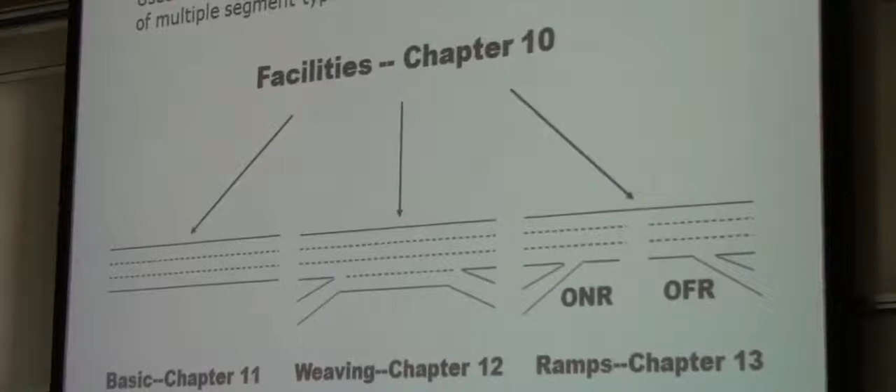So chapter 10 is the facilities chapter. It's the chapter that combines the basic segments, the weaving segments, and the merge and diverge segments into a facility context of several miles—10 miles, 11 miles, maybe longer—and also does that over multiple time periods. That goes back all the way to the 2000 manual, where this methodology had the extended time-space domain, where we can look at up to 6 hours in the current computational engine implementation for these facilities, and we can look at queues growing and dissipating.

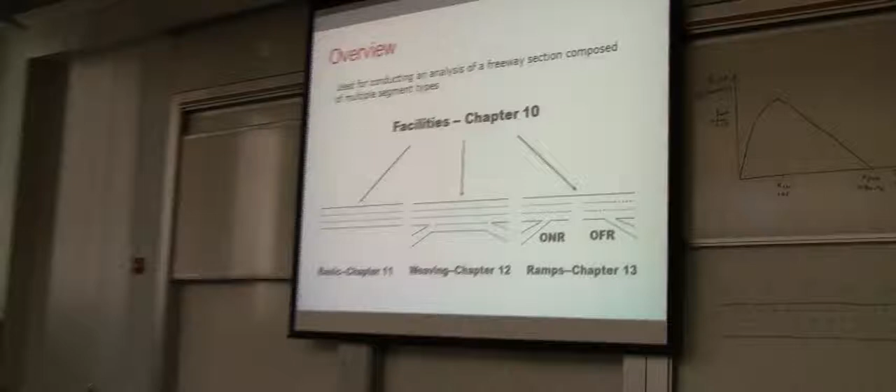Really, on the undersaturated side, this methodology is nothing terribly exciting—it's just aggregation, adding up numbers, doing a weighted average, and so forth. We're not going to spend a whole lot of time on that. But the oversaturated side is a key one to understand, especially important as we're talking about reliability, because one of the key motivations for the HCM major update project is to incorporate all the results from L08, the reliability work, into the manual. This methodology, Freeway Facilities, is the seed file—you can't do reliability for freeways without doing this methodology.

And so even if you're not doing freeway facility analysis, if you're doing freeway reliability, you'll have to go through this process for the seed file, and then we do all the variability in demand and capacity and incidents and rain and weather and so forth. But the core engine did not change significantly in L08. There were some minor improvements, some minor changes to capacity implementation and so forth, but really the concept is the same thing that we had in the 2000s.

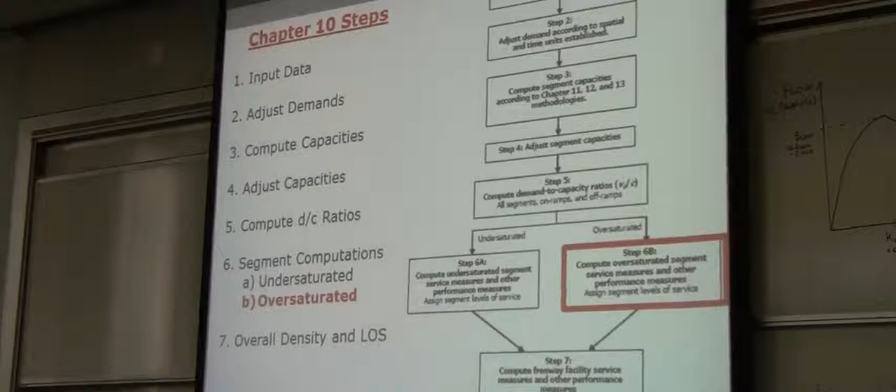And the methodology is relatively straightforward when you read Chapter 10. It gets slightly more complicated when you read Chapter 25, which is the supplemental chapter. But in Chapter 10, it's a pretty easy method: you gather input, you adjust your demands, so the input includes the geometry and includes your traffic volumes, your truck percentages. You adjust those demands to then do your passenger car equivalents and so forth. You estimate segment capacities for all your segments. You can adjust those capacities for incidents, for rain, for weather, work zones, and so forth. That really, step 4, is the key piece of L08, adjusting those capacities to represent impacts of non-recurring congestion.

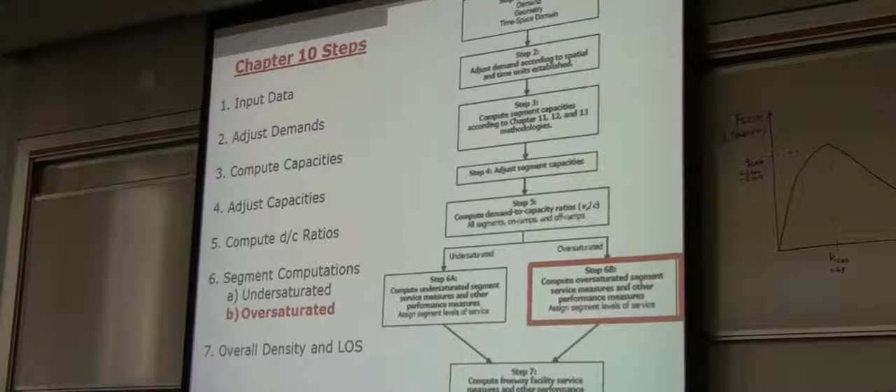You then look at your D over C ratios across all the segments along your facility, and then that's where it gets interesting. If everything is under capacity, if all D over C ratios are less than 1, it's a simple aggregation. But if any segment is over capacity, you go into step 6B, this highlighted box here, and that's the one that then really gets very, very complicated. And really what we're hoping to do today is illuminate a little bit of what's going on inside step 6B, which is described in a lot of detail in Chapter 25.

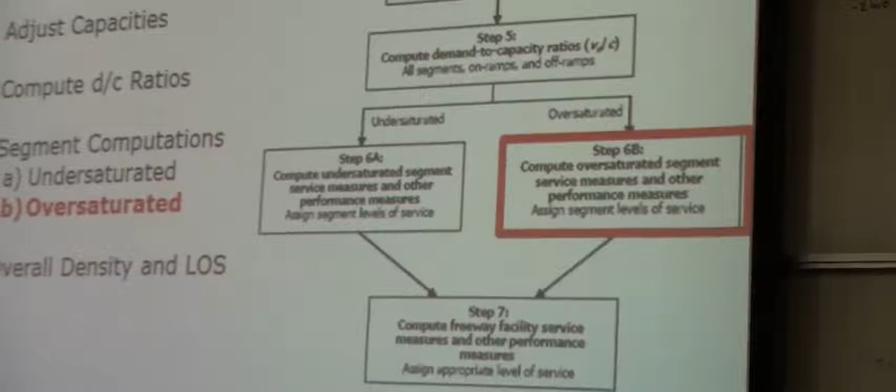So that's what we'll talk about. And then the last step is just, again, estimating the overall density and level of service.

So what is this oversaturation model? You have two primary causes for congestion. You could have congestion either caused by excess demand or by a reduction in capacity or by some combination. All right, so if you have a fixed facility, yes sir, please, it's interactive.

It's interactive. Can you get kicked into the oversaturation model if you just have a ramp merge problem? If you have a ramp merge problem, it will depend. It depends on whether it's only the ramp that's over capacity or whether it's the main line that's also over capacity. But if the procedure in Chapter 13, if the ramp influence area is over capacity, it's essentially looking for any D over C greater than 1. So yes, if the main line fails in the ramp segment, then it will be invoked. D over C greater than 1 across all lanes. It could be the two right lanes.

Okay, great. Yeah. However, it will not be invoked if it's just the on-ramp, and that's the discussion we had at the webinar, that if it's only the on-ramp that's oversaturated, but the main line itself is undersaturated, then you just have really long queues on the ramp, but you don't have any mainline queuing. That's debatable whether that's true, but that's the way it's currently implemented.

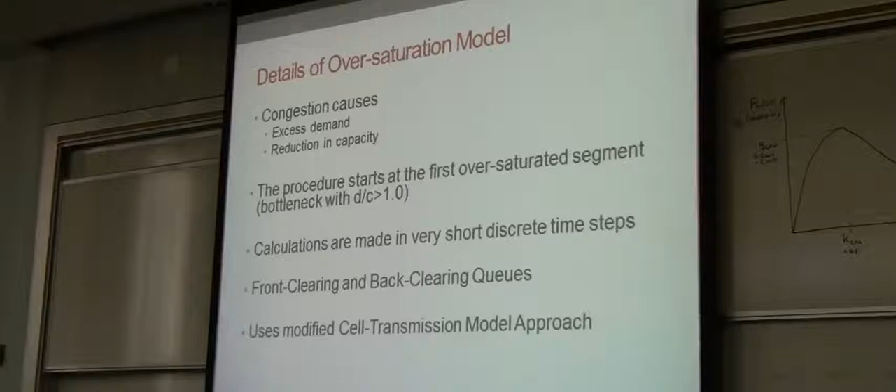So this procedure starts if any segment has D over C greater than 1, and what happens is that these calculations are done in very short, discrete time steps, and what I've called here a modified cell transmission approach. And that's really the key to understanding this methodology.

And it allows you to handle front clearing queues and back clearing queues. Back clearing queues is your standard congestion where you have a bottleneck, you have demand that increases, capacity is fixed, the demand drops, and then the queue slowly clears from the back. The front clearing queue is one that happens as a result of an incident. When you have a relatively fixed demand, for example, you have a temporary drop in capacity due to the incident, it is resolved, and then the queue clears from the front. Both of these are within Chapter 10, but they're implemented slightly differently, and we'll talk about what those differences are.

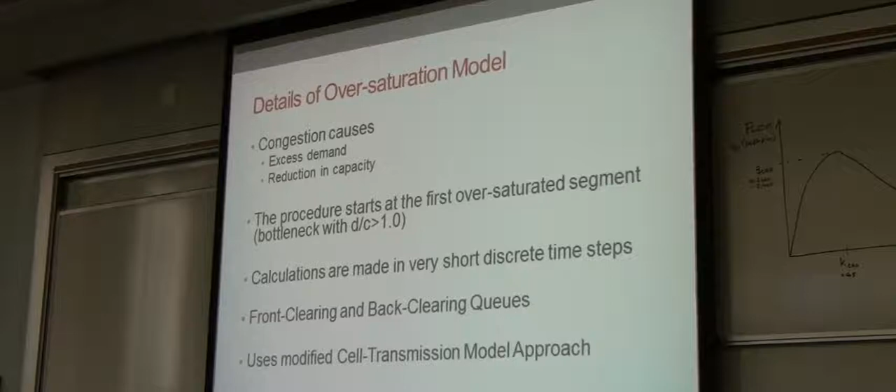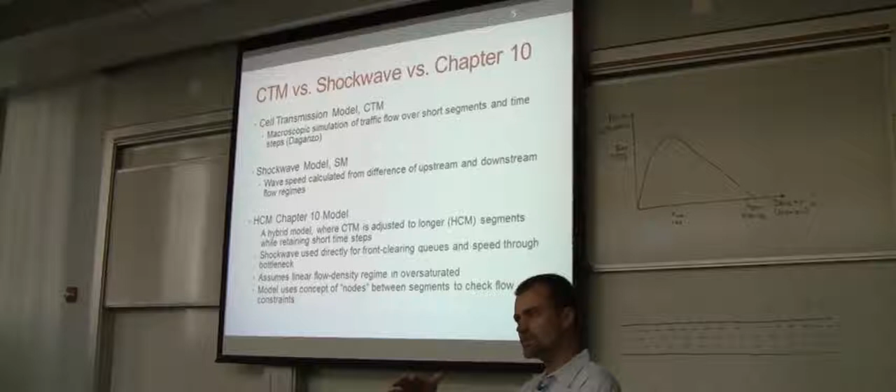So what I mean by this modified cell transmission approach, and I think this is one of the biggest areas of confusion in this chapter, is that there's a diagram that talks about shock waves, and it talks about the Daganzo cell transmission model, but what are we actually doing here? Daganzo introduced basically this macroscopic simulation model sometime in the mid-90s that basically takes a facility and divides it into short segments and into short time steps, and then basically models, on a macroscopic level, flow moving from one cell into the next cell. And that flow is limited by certain flow constraints, which we'll go into a good amount of detail here in a second.

It has nothing to do with microsimulation. There's no little vehicles moving around. It's not like CORSIM or VISSIM or any of those, but it's still a simulation where in every time step you check these various constraints, and based on those constraints, that basically predicts how much flow is processed across a node boundary in the next time step.

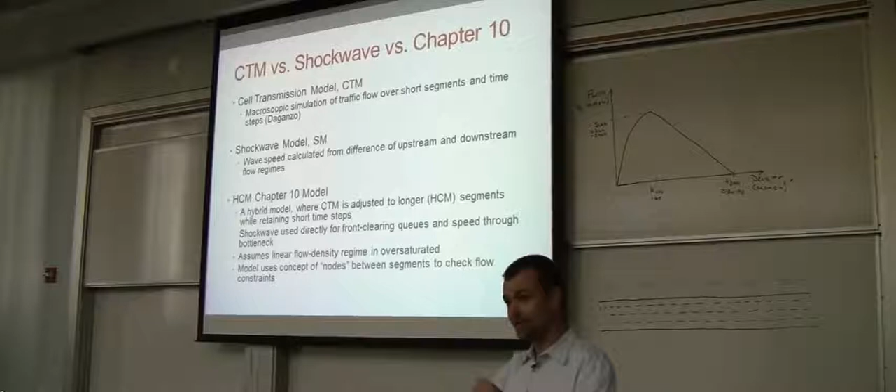How is this different from shockwave, which we all probably went through at some point in some entry-level graduate class? It's very different in the sense that a shockwave is just an analytical estimate of what the congestion regime is. We can't talk about freeways without some speed-flow or flow-density regime. The shockwave model looks at some upstream condition, where this is flow, this is density, and some condition in the queue within the bottleneck, then you have a shockwave describing the transition between those two regimes, where the slope of that line is the speed of the shockwave.

It's a very common principle in freeway theory, but it has nothing to do with what we're doing in FreeVal, or in the freeway facilities method. The only place we're using shockwaves is actually for front clearing queues, which we'll go back to a little bit later. But for the standard bottleneck analysis, for the standard back clearing queues, shockwave analysis is not used.

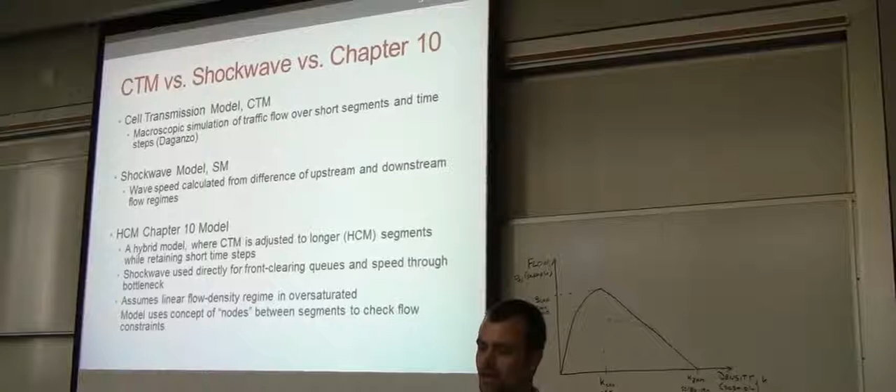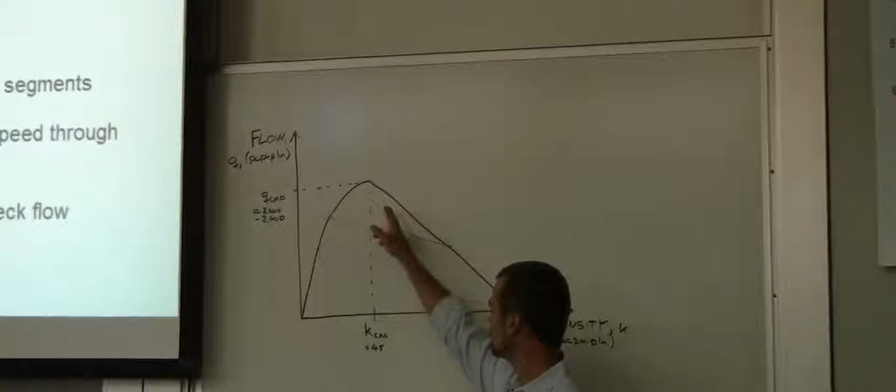Currently we have essentially a three-regime model to describe speed-flow or flow-density within freeway facilities. Anything density less than 45, if we look at a basic segment, we have a linear portion here, which is basically the fixed free flow speed up until some break point. Then after that, we have some curved relationship up to capacity, and we have some new speed-flow curves that were introduced with the HCM 2010. So essentially you have one regime where you have a linear relationship, then a curved relationship. Then once you exceed a density of 45 on the oversaturated side, you do have a linear relationship.

There's lots of research out there, both from the US and internationally, that suggests some other shape of that curve, something that may look more like this. But this is what we currently have. Okay?

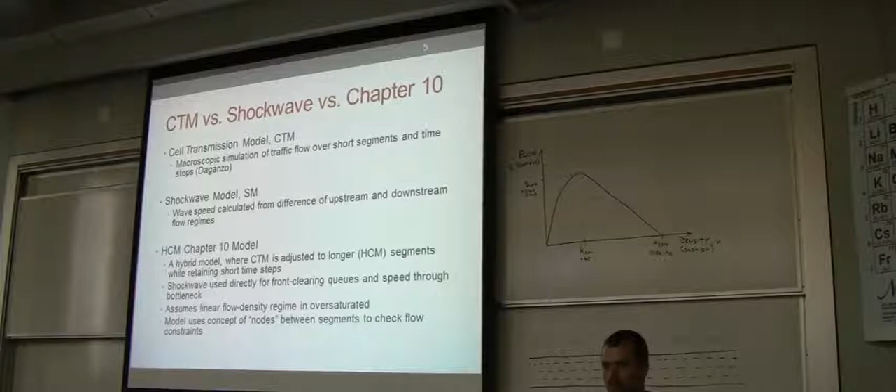So what does Chapter 10 do? What do we actually do? It's a hybrid model where we use a cell transmission-like approach, but we use HCM segments for the space separation. So rather than using Daganzo's really short segments, we divide the segments up consistent with the definitions in Chapter 11, 12, and 13 into basic segment, weaving segment, merge, and diverge segments.

But the time steps are still very, very short. Even though the HCM is based on 15-minute analysis, the iterations in oversaturated conditions are actually being performed every 15 seconds. So it is a macroscopic simulation model within the Highway Capacity Manual, going back to the 2000 edition, that estimates queues building and dissipating over time.

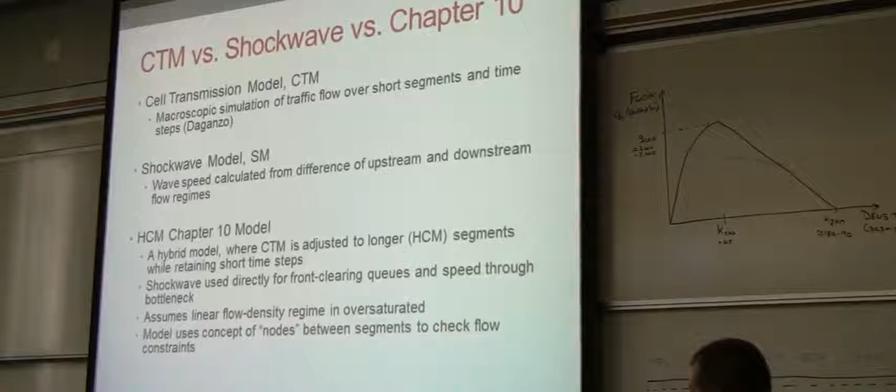We do use the shockwave to estimate some impacts for front clearing queues based on this relationship we just showed. We also use this speed-flow relationship to actually estimate the density at the bottleneck and to get a sense of different flow constraints that we'll talk about more.

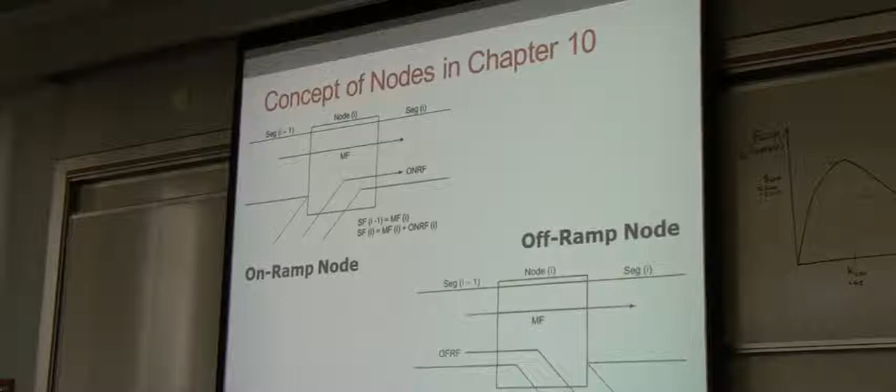What's really important in understanding this is the concept of nodes, and that really sets up the discussion for the rest of the workshop. This mouse definitely doesn't work. Because essentially, while HCM chapters 11, 12, and 13 talk about segments—do I move around too much for you, Mike?—while those chapters talk about segments, we actually use nodes within Chapter 10 to check those flow constraints.

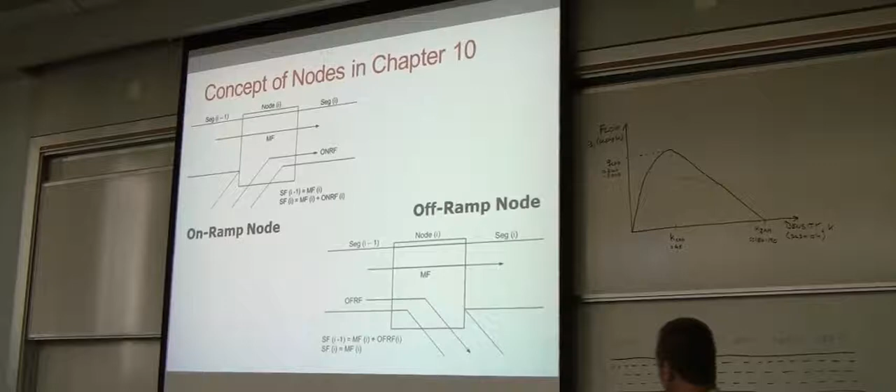This is very different from a node on the interrupted flow side. It has nothing to do with a signalized intersection or a roundabout node. It's not a point analysis, and we don't get performance measures for that point. But we use the concept of nodes to check how much traffic can actually move from segment 1 into segment 2, and we check that every time step.

These are exhibits directly out of Chapter 10 and Chapter 25: the concept of an on-ramp node, an off-ramp node, but really also two basic segments have a node in between at the boundary that checks demand coming in, capacity downstream, and how much traffic can actually go through. Some of these terms, like mainline flow, or MF, is actually the flow that can get processed through a node, but that flow is subject to a whole series of constraints.

And it can be constrained by the upstream capacity, it can be constrained by the downstream capacity. It can be constrained by the flow delivered from the upstream segment, because there might be a queue further upstream, to where the actual flow arriving is less than whatever theoretical demand we put in.

It can also be constrained by an on-ramp, where the mainline demand has to share capacity with the on-ramp, and there's certain algorithms that allocate capacity between the mainline and the on-ramp, and we refer to that as the MO1 constraint. It can also be constrained by any queue that happens in the downstream segment, where depending on what the severity of the queue is.

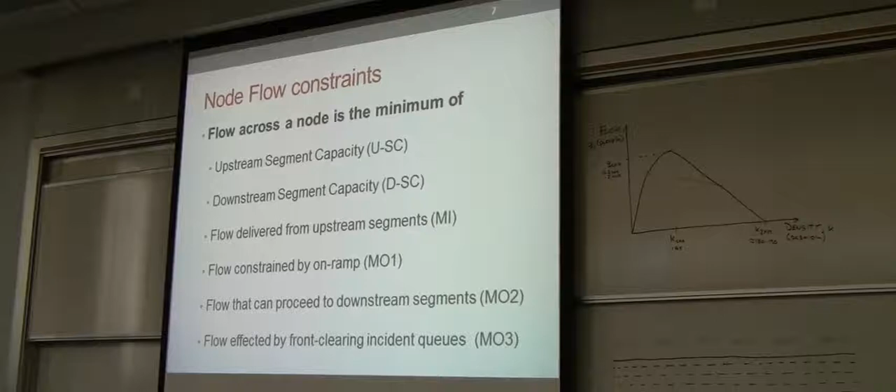And it does that every 15 seconds until you reach the end of the 15-minute time period. And it ultimately happens sequentially. The actual procedure is relatively linear, even though the real flow chart in Chapter 25 goes over, I think, 5 or 6 pages in the HCM. But the actual process is fairly linear.

You initialize your segments with your base demand and capacities. You check off-ramp constraints. You get your mainline input or your demands. You then check for on-ramp constraints. You then calculate your actual mainline output. This is where all those mainline output constraints, MO1, MO2, MO3, are applied.

And then those translate to some sort of a mainline flow across the node. So the actual traffic processed across the node as a function of all those other constraints. And then that gets translated into a segment flow, and then aggregated into facility performance measures. So it's a relatively straightforward process, but there are a lot of computations involved, and they're repeated many, many times.

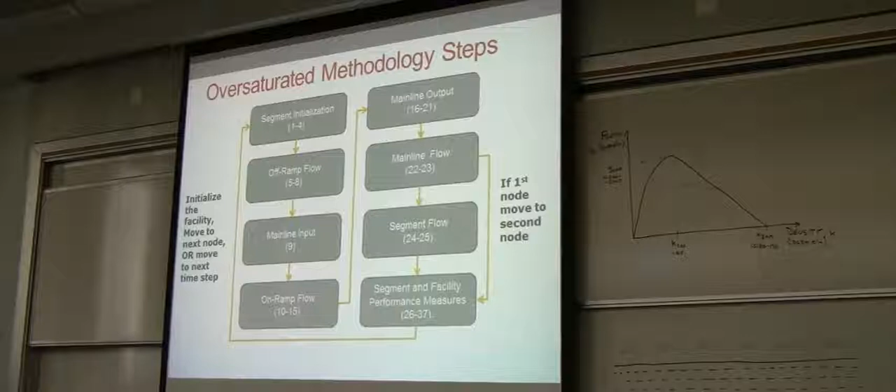Exactly, yeah, exactly. The demand, all the inputs happen in 15 minutes, even though the calculations are performed in 15 seconds. And the reason that's done is that a segment may fill up to storage capacity within those 15 minutes. And there's actually output in the computational engine that tells you the time interval or minute that queuing begins on a certain segment.

So there is a discussion in, I believe, Chapter 25 on basically a trade-off between segment length and the time step. And basically, if you have time steps that are too long, you may get to the condition where a queue fills up more than one segment within that time step.

So for example, if you have a 1,000-foot, or a short, let's say a 300-foot segment, and you have a very long time step of a minute, and you have a queue, the red line, that shockwave, that grows at a rate that's faster than that segment, then you might get into a situation where the segment is basically over full, beyond jam density, before you can do the next iteration.

And so with the 15 seconds, we can basically allow segment lengths going down to about 300 feet or so. It actually used to be, back in the HCM 2000, when computers weren't quite as fast, you used to have longer time steps just to allow the computations to go.

But now we've gone down to 15 seconds to allow very short segment length. That's ultimately the trade-off. You don't want a queue to fill up more than one segment in one time step. But with the 15 second time step, you could go lower. It's a question of how long you want to wait. You could theoretically go down to 5 seconds or even 1 second, but then you're basically at micro simulation.

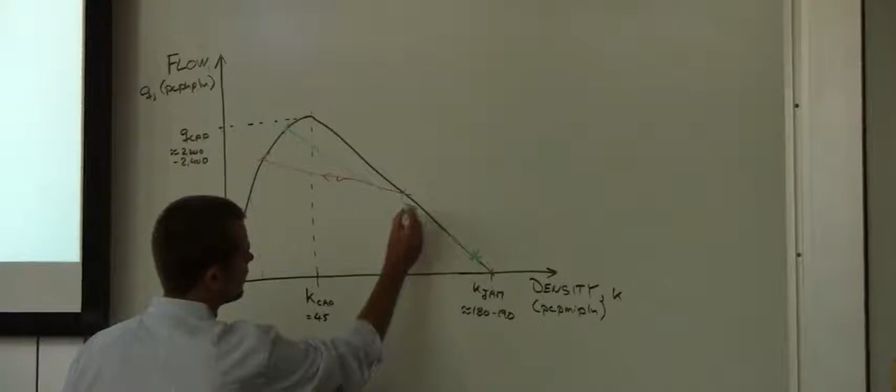At 300 feet, the methodology becomes less reliable below that. If you have a very short segment, say 100 feet, with a very high upstream demand and a very low downstream capacity - this is L08 written all over it, like an incident during a heavy rain event with very low capacity - the result is a very fast-moving shock wave. If that shock wave's rate of growth fills up the segment beyond capacity, then while in theory that segment should be at a certain density, the algorithm doesn't compute it fast enough, and you may end up with densities somewhere out of range. We've seen that in L08 for other issues. So theoretically, with very high upstream demand, very low downstream capacity, and very short segments, you can run into an issue where a segment fills up beyond jam density - cars stacked vertically, basically.

If you go below 15 seconds, you can expect more accuracy under extreme conditions. We had some other issues we identified in the code through L08 that already fixed this, but that's in theory at least what could happen.

I just broke your mic. I just won't use the clip. Okay, I'll just hold it.

It sounds like the 15 seconds is just something convenient for the purposes of the spreadsheet requirement of the methodology. That's correct. I don't know if there's any thought on going too low - if you go down to 0.1 seconds or something, I don't know if there are other concerns that show up.

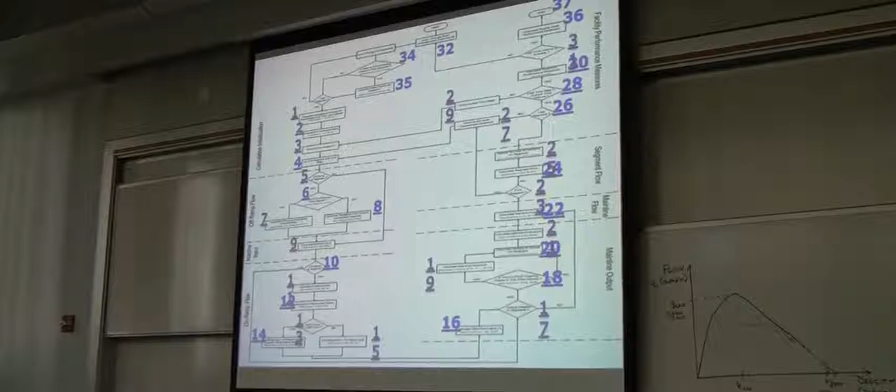Okay, so this is the simplified flow chart. In reality, it looks like this. Thanks to Scott for taking 5 or 6 pages in Chapter 25 and fitting it onto one PowerPoint slide. We're not going to go through all these steps, but ultimately, this.

So ultimately, this is nothing different from that, and maybe this should make its way into Chapter 25 in the next iteration - that way maybe people will actually read it, because by the time you get to this it gets a little bit scary. So, with however much time we have, there's no clock in here, so you're at our mercy until somebody runs us out.

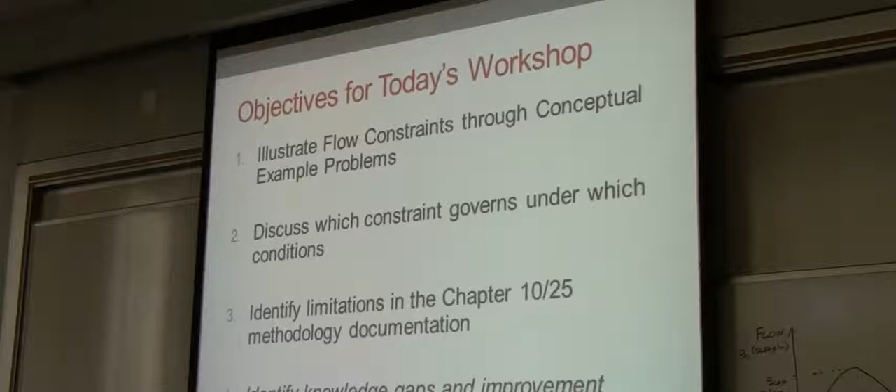What we're going to do for the rest of the workshop is really try to illustrate these flow constraints through some conceptual example problems that Scott developed, and then really have an interactive discussion of which constraint governs - that's ultimately what we're trying to get at. So for these different conditions, what do you think is going to happen? If in that process we can identify limitations in our documentation, that'd be really great. If you've read chapters 10 and 25, you're intimately familiar with them, and we're telling you something today you've never heard before, that's a good indication we need to add some text to it, whoever the contractor is for the next iteration. And if we can identify knowledge gaps and improvement needs, that would be great as well. We'll keep track of all those.

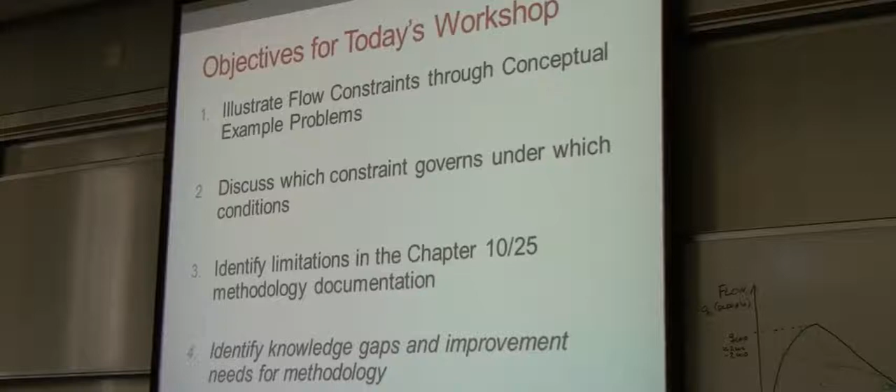Any questions before we go to the hands-on? So if we can close the doors...

Comprehensive flow chart, and we'll show you the equations and equation numbers that come from chapter 25 or chapter 10. But the focus today is going to be more qualitative, not getting into the real nitty-gritty of these equations. The plan is that at the annual meeting we can work through a numerical example or two and give you a full understanding of the quantitative aspects of this. But today the focus is more qualitative, getting into discussion about some of the constraints that Bastian already introduced, MO1, MO2, and so on.

I'm going to step through this presentation where we've got this comprehensive flow chart, and jump to a breakout slide that deals with that section of the flow chart, introduce the topic, and turn it over to Bastian to expand on some of the topics. The plan is also to use the whiteboard to show some simple geometric configurations that apply to these concepts we're talking about. Again, this is really informal.

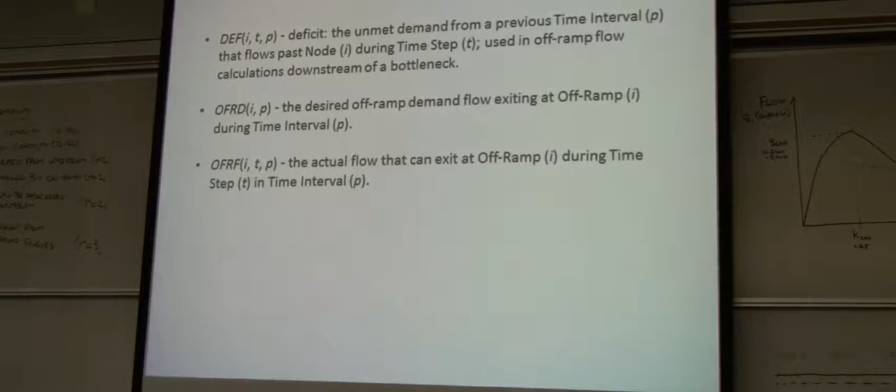On-ramp variables - one thing that probably hasn't been mentioned yet is RM, ramp metering, which might be a constraint to be concerned with at the on-ramp. We have off-ramp variables, the deficit condition we'll get into - we'll have a discussion about that as well. These got introduced in Bastian's presentation.

So here's all the logic for this procedure. This whole flow chart is contained within chapter 25, just not as you see it here, because everything gets really small when you piece the whole thing together. It's presented in 5 or 6 different sections throughout chapter 25. I managed to get a student to piece this whole thing together so you can see the whole logic from beginning to end, but again it's so small you can't see anything that's going on there.

I'm going to go ahead and step through these different sections of the flow chart. The numbers are not necessarily identical to the numbers you see in chapter 25, because this was based on my implementation in HCS, which is a little bit different. I think 1 through 30 are the same, and then I have some preliminary stuff that I'm doing in my program, so I just call those point 1 through point 5. We'll go ahead and jump into step 1.

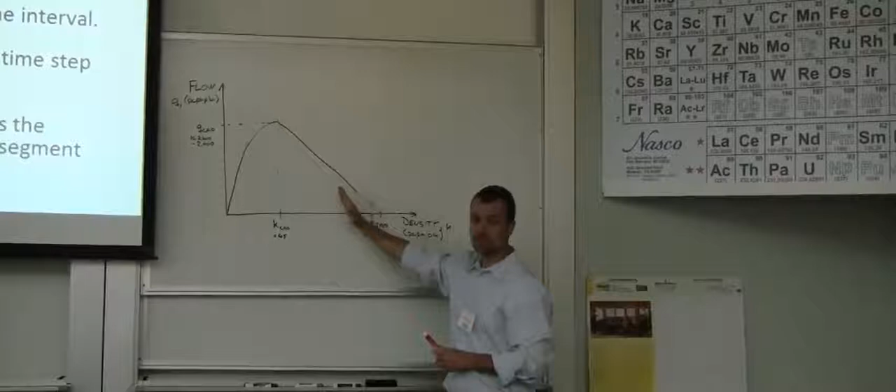And then what the methodology will do, it will change that flow density relationship, still linear, but now in a different slope basically. And essentially what happens for any given input, you essentially could go from the fixed bottleneck capacity, you're going from this point to that point, and as a result you have a lower density. And same traffic, lower density means longer queue.

It will move at a different speed, because the speed in the queue is whatever the slope from the origin to that point. So by changing this, you end up with a slightly faster queue, but you also result in a longer queue. And so you have those trade-offs.

Since we don't let you change the shape of this curve, we only let you change this intercept. Well, we let you change that point too, but you will always have trade-offs. But if your ultimate goal is to show correct length of queue, then lowering your jam density will achieve that.

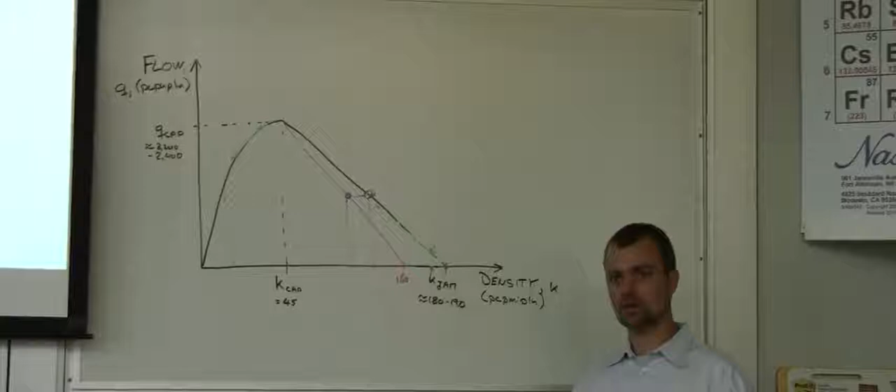Same with Romeo, yeah, very important point about the jam density. Those of you that are ever interested in comparing simulation to the results of the Freeway Facilities Procedure, it's something you definitely need to pay attention to. CORSIM, for example, by default, would give you jam density about 225 passenger cars per mile per lane, versus the default that you've got like 190 Freeway Facilities. So that'll translate to a big difference in your queue lengths.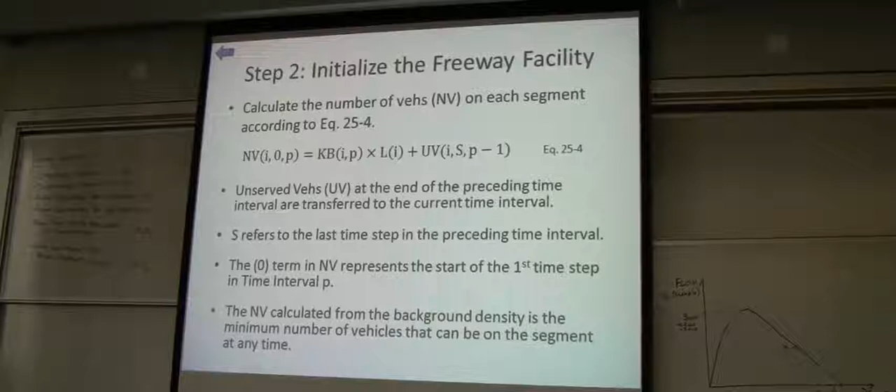Okay, next step is initializing the Freeway facility. The point here to stress is just number of vehicles. So a lot of the calculations revolve around looking at the number of vehicles that are on a particular length. So with that, we're just using our background density and the length of the segment to then figure out what our number of vehicles are, because ultimately we're going to be keeping track of how many vehicles are coming in, how many are going out, and then we can get unserved vehicles from that and so on. That will then translate to future time periods and so forth.

Anything else you want to add? Well, only that actually is what drives the performance measure of density. So at the very end, if we jump ahead to the very end of the methodology, to get your density within any given segment in oversaturated conditions, it's calculated based on these number of vehicles. So you get number of vehicles, you get a flow rate, you have a segment length that is converted to a density, and then that is then converted to a speed. So all your performance measures in the oversaturated are driven by the number of vehicles in the segment and what density that translates to.

And I don't recall exactly what I said before, but just to be clear, for CORSIM, default was vehicles per mile. Again, CORSIM doesn't deal with passenger cars. In Freeway facilities, we're dealing with passenger cars and the units there.

Okay, this is just some administrative stuff here. Again, as Bastian mentioned, basically we're going for each time step and then each segment within each time step. And step 5 is looking to see whether we have an off-ramp at that particular segment. And if we do, we're going to go to step 6. If we don't, we're going to go ahead and jump to step 9.

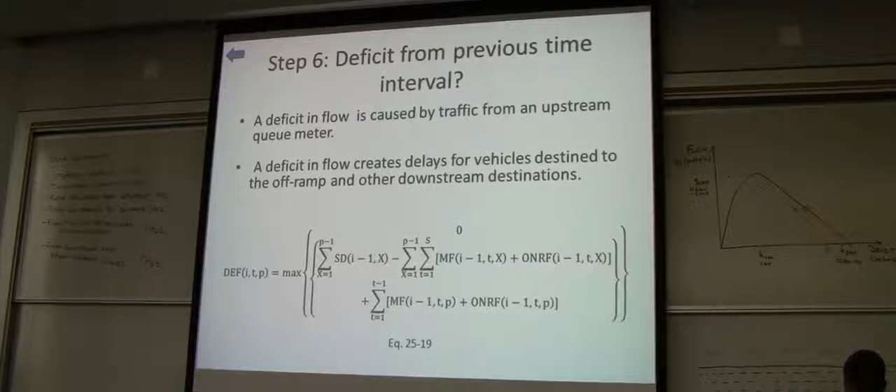So essentially, we're introducing a bottleneck of some sort, and we have an off-ramp segment, something like that. This is, I don't know if you can see that with the lights. There's plenty of room, plenty of room in the front.

So here you've got a potential bottleneck situation depending on the demand. And so it could be that all of your off-ramp demand that you've specified for a certain time period is not going to be able to reach that off-ramp in the designated time period due to this bottleneck situation. So that's what the deficit calculation is dealing with here. So we need to keep track of off-ramp bound vehicles in a particular time period that can't reach the off-ramp in that time period, and then monitor them for the subsequent time periods to see when we can get them to that off-ramp.

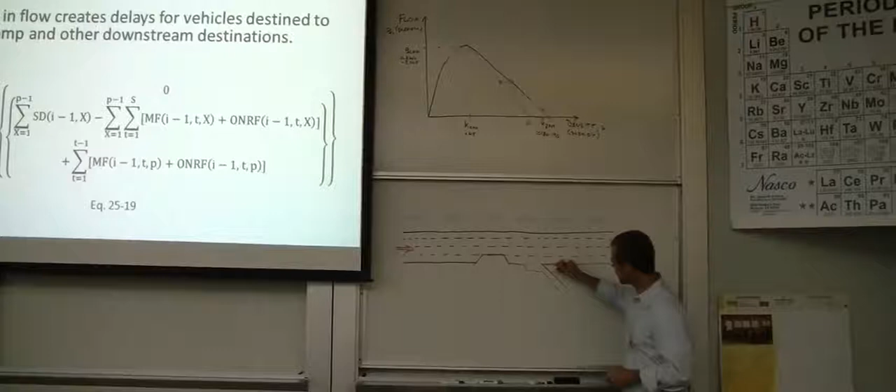The user input that you specify is essentially a mainline input, traffic that goes overall into your facility, and then you specify the demand at every on-ramp and every off-ramp. And so really the only two numbers in terms of volume or demand inputs are these two.

And the reality of this flow, whatever that demand is, if the volume coming in exceeds the capacity of this segment and this lane drops, then you end up with a flow deficit at this off-ramp. So the calculated volume served at this off-ramp is limited by the upstream bottleneck, and it assumes proportionality. We don't have ODs in freeway facilities - if you're keeping track of limitations, that's a pretty big one. We're assuming a proportional allocation of that input to these various outputs, so we reduce that number.

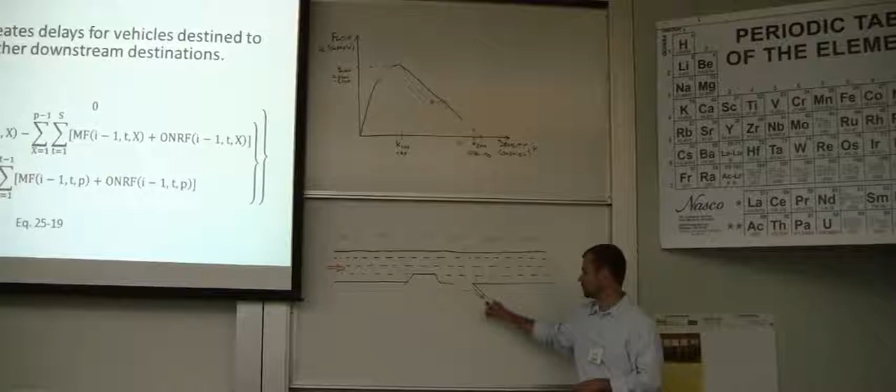Another quick caveat: if you are trying to enter this number from a user perspective, and you have congestion, you need to make sure you come up with a demand number somehow. There's actually a procedure in Chapter 25 to adjust a field measured volume served to an expected demand, because that's what you enter in the method.

Oh, just that quite often when you go through those bottlenecks, and once you go past it, traffic actually opens up and moves. So if you impose a bottleneck every so often, you create an opportunity for traffic to move beyond it, right? Right, yeah. It will arrive later, that's all it does. But it doesn't show up and you can't really do what you're trying to do - this is just making up numbers.

So this is a demand of 4,000, and here you have a capacity of 3,000, and then you have a theoretical on-ramp, off-ramp demand of 1,000. Then it will account for the fact that 1,000 vehicles, or a quarter of the demand, is held up somewhere, and it basically will take that and turn it into 750, with the rest of the demand being processed in the next time interval.

Like Nagy was alluding to, an important point is that if you're looking at the output from freeway facilities, you may see a particular time period where the amount of flow served is greater than the demand for that time period, because you've got carryover. That might be a situation where you had a bottleneck limiting throughput in that period, and it got carried over to the next time period. So now you see the actual volume served is greater than what the original input demand was in that time period.

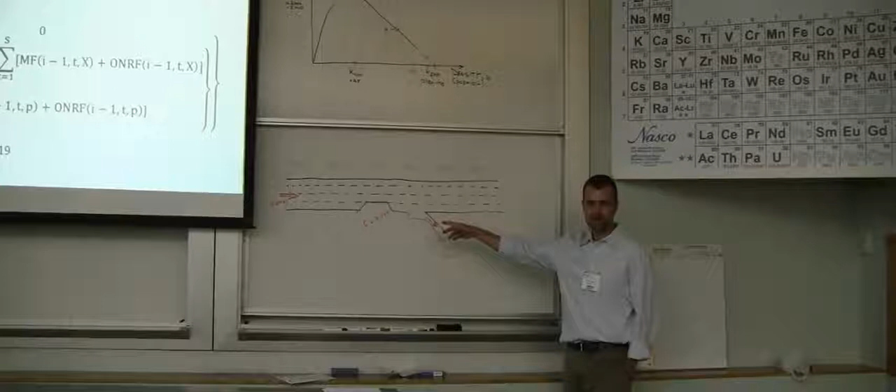It's also not true - another big limitation before anyone asks - if you have a signal or any other bottleneck here that results in a queue actually spilling onto the main line, we currently have no way to model that. That's probably, I would argue, the biggest limitation in this methodology, because it happens all the time - you have a diamond or whatever interchange configuration, you have a queue that spills onto your freeway, and we have no way other than a warning message that says your off-ramp is over capacity. But that doesn't help you much.

So you could manually go in here and reduce the capacity here, but we currently do not have a lane by lane or any sort of adjustment of density within this area - again, with the caveat of the base method in Chapter 13.

This can also be very similar to what you see in most freeway systems, with an on-ramp coming on and creating the same type of impact as an off-ramp, right? Yeah. And one thing - I try to think solutions oriented - one approach I've thought about and talked to people about is changing the on-ramp and off-ramp to an off-ramp and on-ramp with, say, an auxiliary lane or a CD road or something in between.

Say you have 6,000 vehicles, 500 getting off, 500 getting on. You end up with 6,000, 5,500, 6,000. So the bottleneck never occurs, versus 6,000, 6,500, 6,000. So it seems like how we design interchanges and on and off ramps, we've been doing it wrong.

If we could just make a slight modification to how we design our freeways, a lot of them are failing, and the first thing we want to do is go up and add a fourth lane, widen and lengthen the bridges, and create a huge amount of infrastructure that we could have probably simply designed the off and on ramps a little bit differently, and it would work. At least it would work longer, and it might keep you from adding an extra lane.

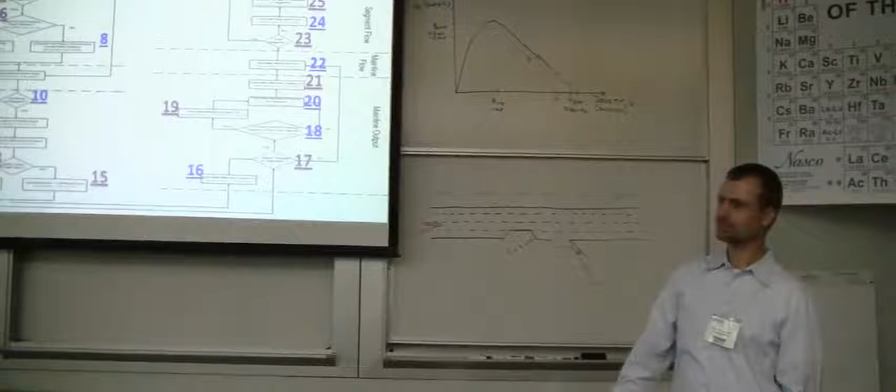Since you brought up the uniformity across all lanes limitation, I'll give you a couple more motivations. This is for HOV lane analysis, where you have continuously accessible HOVs, so you have uneven usage of the lanes. The other time it'd be nice to do a lane-by-lane analysis would be for truck lanes, truck climbing lanes, long steep grades, especially when an agency is looking at establishing a rule or policy of limiting trucks to only the 2 right-hand lanes, our methodology would not be sensitive to that right now.

I'll let Scott proceed, but I'll hang out the line. Not to mention active traffic management where you add an extra lane, shoulder lane during peak hours. The only place where we do have something special is there's a managed lane procedure related to freeway. The managed lane, even if it's a diamond lane, is handled separately from the general purpose. But that's the only exception.

We've got a lot of steps to go through here still, so I'm going to jump to step 9. This block here with steps 6, 7, and 8 deal with some differences in the deficit calculation, but the idea was just to talk about the overall concept of the off-ramp deficit. Step 9, now we're just trying to determine our mainline input here, looking at our mainline flow from an upstream segment, adding any on-ramp flows, subtracting any off-ramp flows, and also looking at unserved vehicles from the previous time step.

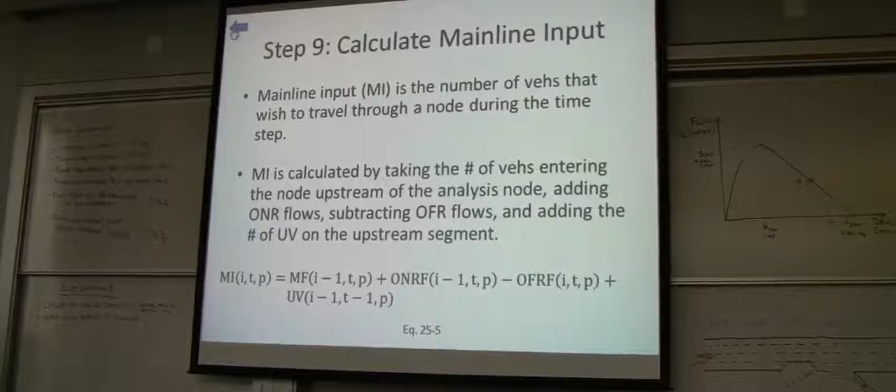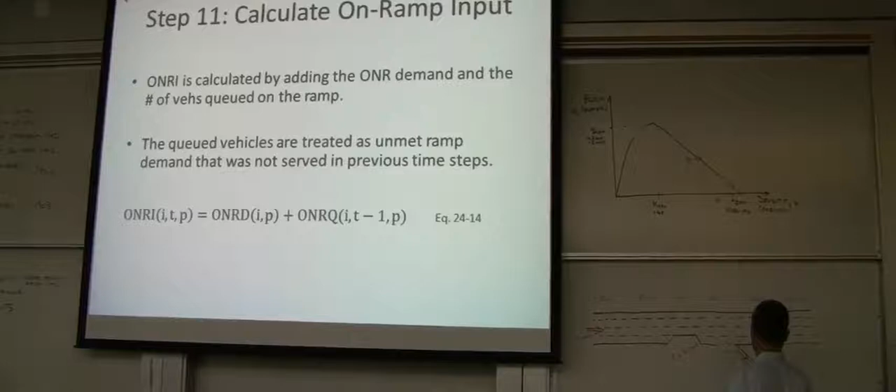Now we're going to get into the section that deals with on-ramps. Step 10, we're just asking, do we have an on-ramp at this node? If yes, we're going to go to step 11. Maybe Bastian, you want to modify the figure down there to have an on-ramp? Sure. The on-ramp for the bottleneck? I wouldn't worry about the bottleneck, just the on-ramp. Don't add a lane drop, I guess.

I had a question about the previous example, just terminology. Bastian, what did you call the name of that phenomenon when the demand on the off-ramp can't all get there? Flow deficit is what we called it. Is that analogous to the concept of demand starvation? I think so, I was thinking the same. Should we be using consistent terms? Well, I think ideally throughout the Highway Capacity Manual it would be nice to have consistency in terms. I think we have a number of locations now where we are using the same variables or same terms that mean different things.

Mostly across chapters, but apparently there is a situation that's brought up where we have inconsistency within the same chapter. Hopefully, that's something we can address in the HCM 2015 update.

You want to talk a little bit about the concept of on-ramp input? Sure. So we still have our 4,000 here, and basically we'd want to add some sort of demand to that on-ramp. Those are essentially the only demands you enter as a user: the mainline in, and all on-ramp, off-ramp demands. You never input whatever volume goes through here, because that is all estimated. It becomes a function of the mainline in and the ramp in, and it changes throughout the methodology, through queuing and so forth. So all you really need to worry about is those.

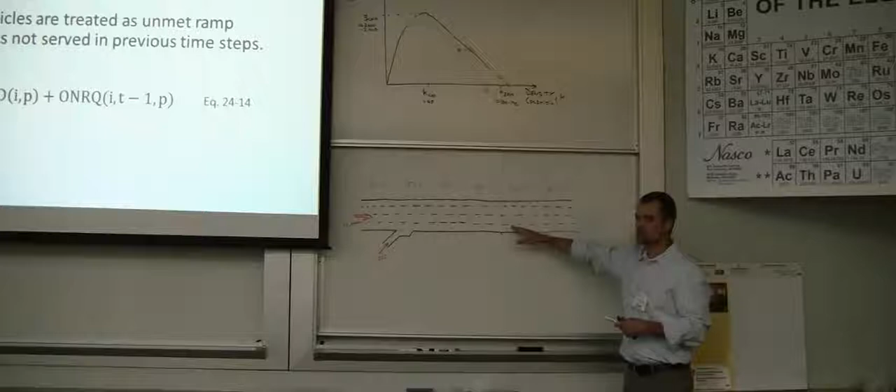One thing to mention is that you can vary truck and RV percentages for any of these, and the method will also calculate the weighted average. Again, there's no OD - we have no way of modeling, for example, that if this is 5% trucks and this is 20% trucks, we're just assuming that whatever the mixture is here gets uniformly distributed downstream. We can have an off-ramp also saying 20% trucks, but we can't really say these guys go there and these guys go here. We just don't have that detail. It's a limitation. I don't know that we'll overcome it - it's a simulation application.

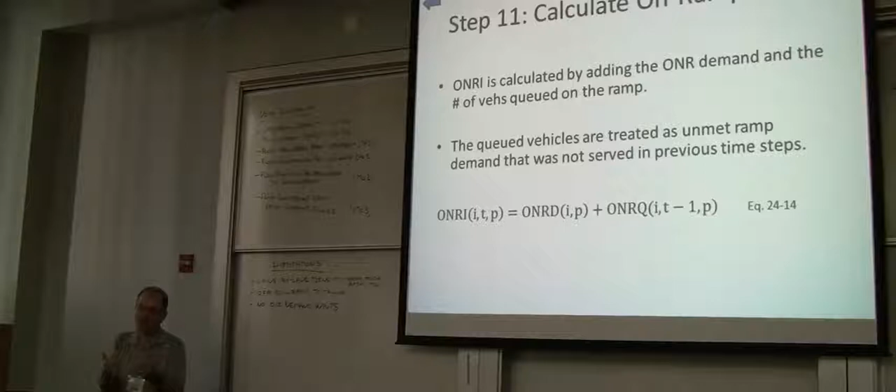So with the on-ramp input, we're looking at potentially what the capacity is of the on-ramp. And if your demand is exceeding that capacity, you're going to have queuing, and that queuing will carry over in subsequent time periods and add to your on-ramp input. While ramp metering is not explicitly modeled within this methodology, if you have a fixed ramp metering rate, you can use that as your demand input from that on-ramp.

I have the next limitation. Before anyone else asks that question - when you're using the methodology in FREEVAL, and you look at your ramp queues, we report them, and they're very, very long. You will easily get 10-mile ramp queues that come out of FREEVAL. Typically they're used in the system delay, not in the mainline delay, so they're easily ignored. If they're large numbers and you can't explain them, ignoring them is always a good practice.

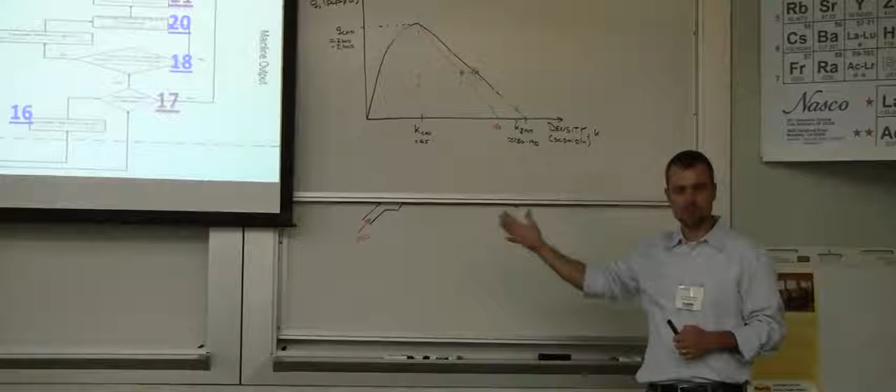But one of the big limitations is that we have no way to actually model what the ramp densities are. We're modeling the on-ramp queue at the same density of the mainline, and I would argue they have very little in common. So if you're mildly congested, with densities of 60 or so, we're essentially propagating that density of 60 passenger cars per mile onto the on-ramp, and we have no bunching algorithm of any sort. Arguably, every time I'm stuck on an on-ramp, I'm bumper to bumper - I'm at jam density. The methodology, however, assumes we're propagating everything at the mainline density.

There's no requirement for that - you're just doing it out of convenience. There's nothing in the methodology that requires you to assume the on-ramp density is that, but we have no guidance or data currently on what it should be. We could make another assumption, but we can't change the status quo without empirical support. Sure, is that the idea? Yeah, I guess. I don't know if we can. Doesn't stop us before.

You can make it a user adjustable variable. So that's the difference between a metered or not metered ramp - with a metered ramp, the vehicles are stopped, so you use a stop density. If it's not metered, then the question is, how fast are they moving? I'm pretty sure we have a separate variable for the on-ramp density, although I'm not sure now, and if not, it would be a variable to add.

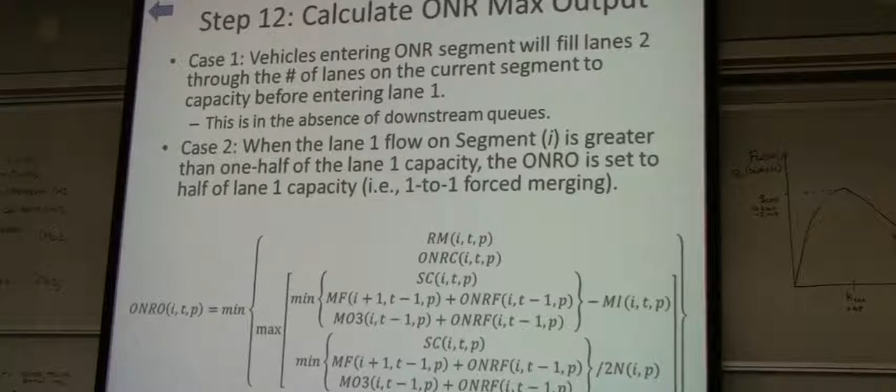But again, there's lots of work to do. Okay, I don't want to get into all the details here. Generally, we want to talk about the concept of an on-ramp segment, where the combination of your mainline flow and your on-ramp flow is going to exceed the downstream capacity. So we have to figure out how to deal with that, and that's going to affect the amount of on-ramp traffic we're going to allow into the segment, relating to the MO1 constraint we're going to get to in a minute. Again, want to qualitatively discuss what's going on here?

It's code language of whatever is written on the left side of the board, or at least some of them. RM is ramp metering, ONRC is on-ramp capacity, SC is segment capacity. Then the minimum of mainline flow plus on-ramp flow, this is the MO3 constraint, which is the front clearing queue constraint. You need to be really careful where you have segments I versus I plus 1, and time interval T versus T minus 1 being the previous one.

We don't have this diagram, but essentially, if you think of a matrix of cells, it basically looks at what's left over from the previous time interval, what's happening in the next downstream segment. A lot of these variables are all defined in the code, in the computational engine, and they're used consistently in the chapter, so they're the same variables.

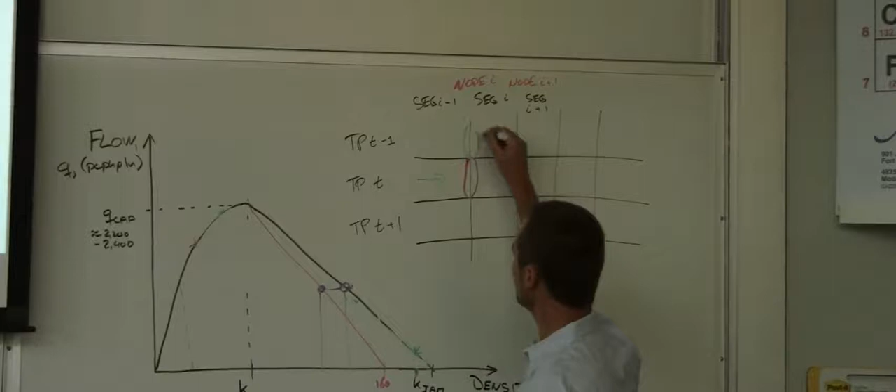We're looking at, for example, unserved vehicles, we'll get to that later, unserved vehicles from the previous time step. We're looking at what happens in terms of queuing on that actual segment, so the segment capacity, IT, the mainline flow of the next downstream segment. So there's kind of a logic to all this, but I think we probably don't do a really good job in the chapter explaining where all these different terms fall in.

We use a cell transmission approach, but we never show this kind of a matrix, where each of these would be. See, I got tripped up myself, they're not time periods, they're time steps. The time periods would be the 15-minute block of time, and then the time steps are, as we have it by default, the 60 time steps within each time period, so 15 seconds per time step in the default situation.

Now here we're looking at maximum output from the on-ramp. And so now the question is, is our on-ramp output greater than or less than our on-ramp input?

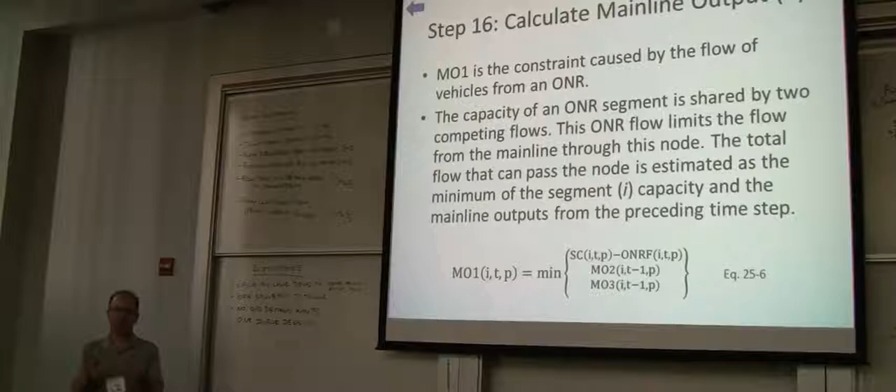Let me jump ahead here a little bit. Okay, so I want to get to the section that talks about the mainline output. This is the constraint condition dealing with essentially the bottleneck created where the combination of the mainline input and the on-ramp input is going to exceed your downstream capacity.

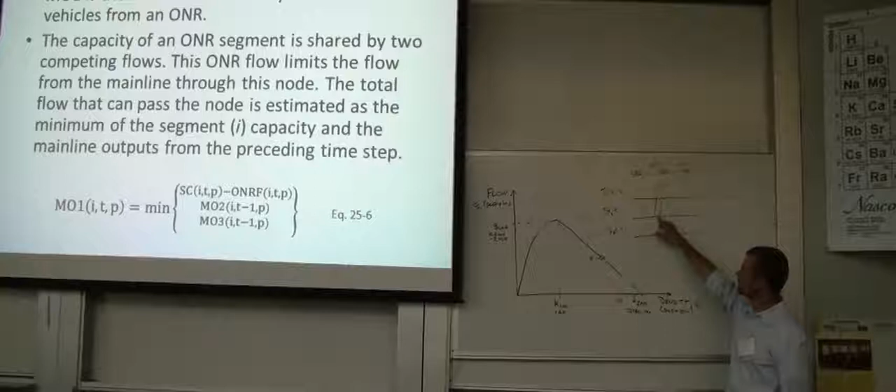Anything else you want to expand on? Well, all these different flow constraints interact. So you have the MO1 constraint, which we call the on-ramp constraint, and it's itself constrained by the segment capacity minus whatever we are processing through the on-ramp, or the MO2 constraint, which is if that segment was already full in the previous time step and we can't get traffic in there, or the MO3 constraint, if there's a front clearing queue in that segment that hasn't reached it yet. We have to check that every time. So for MO1, we can't process more traffic across this red node than the minimum of those three: the capacity minus the flow, the previously queued vehicle, or any front clearing queue impacts.

Quick question. So if you reach capacity in oversaturated conditions within the 15-minute period, does your capacity drop within that interval, or do you wait until the next analysis interval to drop the capacity? So currently, it doesn't drop at all. Like with the queue discharge, it currently doesn't.

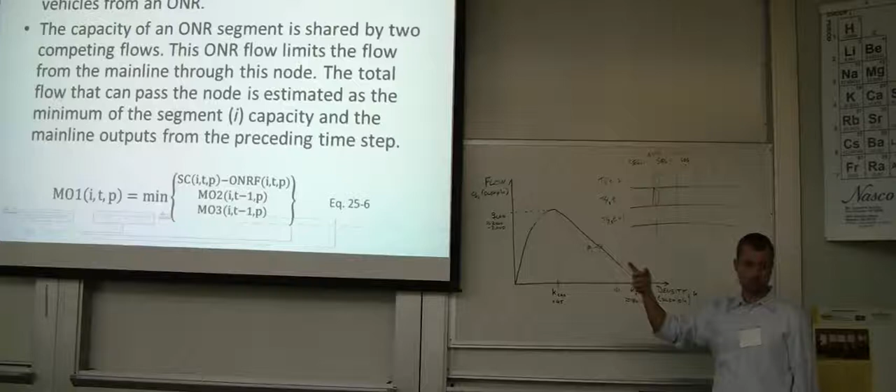We'll implement that for any of the upstream segments as well, but we'll never end up using it, because the flow of any of these upstream segments will always be constrained by MO2, what happens downstream. As a result, the actual segment capacity is never the prevailing constraint. If you're a segment upstream in a queue somewhere, the limit in terms of downstream storage is always going to be less than the theoretical capacity of that segment.

But it happens in the next 15-second time step, essentially. Okay, so it happens within those 15 seconds. It happens for the next 15 seconds. Yeah. Okay. And so does that create an impact upstream in the flows that you took track of?

Well, essentially, the computation is repeated for every cell. And in a way, the computation actually kind of goes backwards. The way it steps through is essentially it goes this way through the facility, and then it goes back to the end, and then it propagates queues this way. So that's essentially how it steps through. It's kind of presented sequentially, but really the calculations happen backwards.

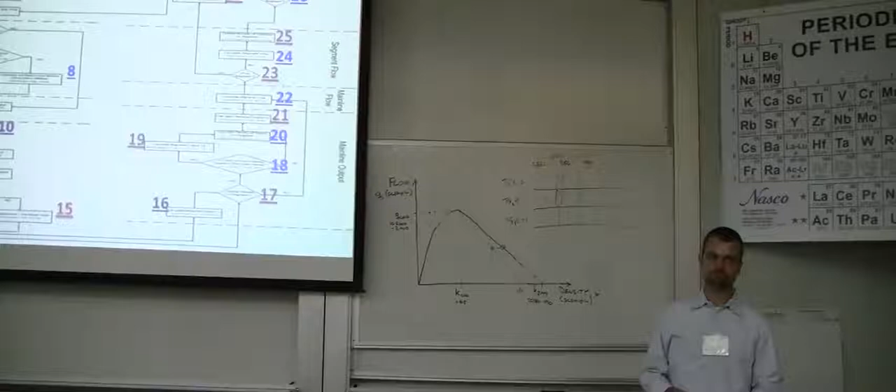Step 17. Here we're checking for a queue situation, so if we have demand exceeding capacity, we're in a queue situation.

We need to check to see if we have a front clearing queue. So again, Bastian talked about a couple different queuing situations. The MO2 is dealing more specifically with your classic bottleneck situation, where you have, for example, a lane drop, and your demand is going to exceed that capacity. The MO3 situation might come about, as Bastian mentioned, say in an incident scenario. You normally have a certain amount of capacity, then an incident reduces the capacity, then the incident gets resolved and the capacity increases again. So that's a little different situation in how the queue is going to clear. That's kind of analogous to a traffic signal situation: cars are stopped, they're queuing up, the light turns green, and so you have a front clearing queue situation.

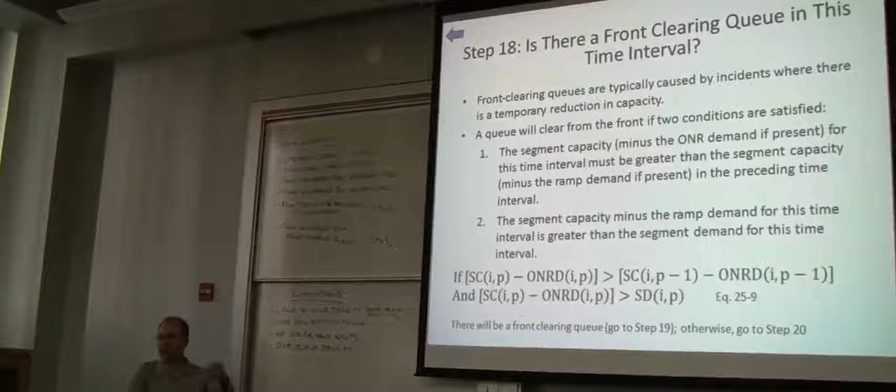And so in that case, that's where the shockwave speed comes into play, because the queue is clearing from the front, but the back of the queue is basically staying stationary until the queue clears out in front, or additional vehicles as they arrive get added to the back of the queue. So we can't start moving vehicles into that downstream segment until that back of queue situation is resolved, and that's again a function of the shockwave speed.

I may be getting a little bit ahead of myself here. We've got a slide, okay, pretty close here. I think Bastian's kind of illustrated this with the flow density graph that we have up here. I'll let you just expand on that.

Well, in reality, it's in there in principle, but it's very, very difficult to show this. In fact, in our training courses we've been trying to come up with some example problems to really show this incident effect and so forth. If you look at the raw calculation, time step by time step, you see it, but in the 15-minute output, it's going to be very difficult to show this. It's in there in theory, and it's an important component, especially for a reliability analysis where we work with incidents routinely.

But it's probably not very high on the list of priorities for the standard Chapter 10 analysis, which is more of a bottleneck-driven analysis, or even for ATM, but it's in there.

Your shockwave speed just ends up being the slope of this particular line, because one of your endpoints is going to be your density at capacity of 45 passenger cars per mile per lane. So it turns out that with our default jam density of 190 passenger cars per mile per lane, it's going to work out to be something like 16.5 miles per hour shockwave speed.

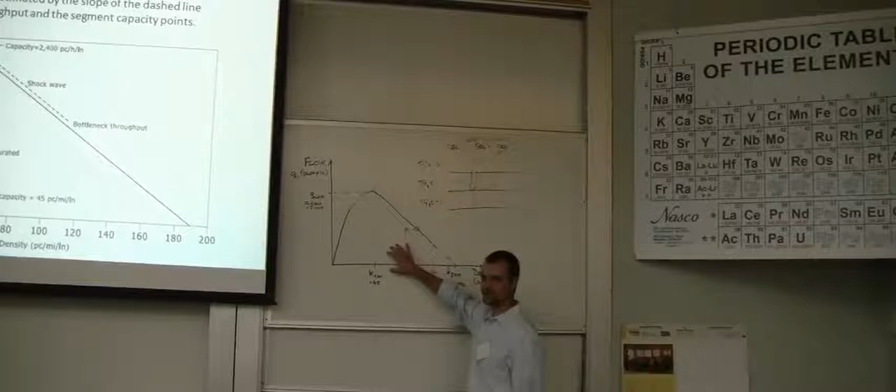The problem is we've generated this graph for the front clearing queues, but we never generated a graph like this to talk about the cell transmission approach. So really, the shockwave implementation is a very small component. It's really only in the case of front clearing queues when it ever prevails. But people don't like text; they flip through pages, right? And they see a diagram, and so now all of a sudden we're doing shockwave. So this is probably our number one learning outcome for the day, kind of understanding the two different components.

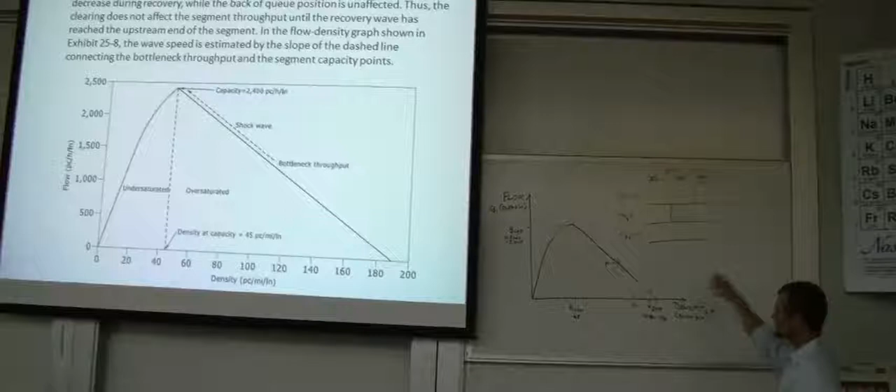The diagram is still important because the slope here, or the shape of the oversaturated flow density, does determine, in this case, these blue lines, the density in the queue. So we're getting those numbers from the same graph, but we're not then translating them into shockwave speeds. We're simulating it using a cell transmission approach.

Okay, step 20 is calculating the density. Perfect segue right there. That's the equation: the density in the queue is the jam density minus jam density and density of capacity times the segment flow and so forth.

It's the KJ, jam density. It's a triangle: density, capacity, the KC. It estimates the density in the queue as a function of that triangle.

So that equation 25-7, if we ever get to it—I'll put the limitation up there in a second—the shape of the oversaturated curve: if we're ever making any changes, this equation is going to be more complicated. So if we ever take whatever this red line is, and if we ever use some of the research that comes out of Sweden and Denmark that we saw at the International Symposium, where there were some relationships that look more like this—if we ever want to do that, then to get from jam density to this point, we basically have to replace that with whatever this equation is.

So this is starting to show, and if you have access to the code and understand the variables, you could actually test the impact of your own oversaturated speed flow models and get some differences.

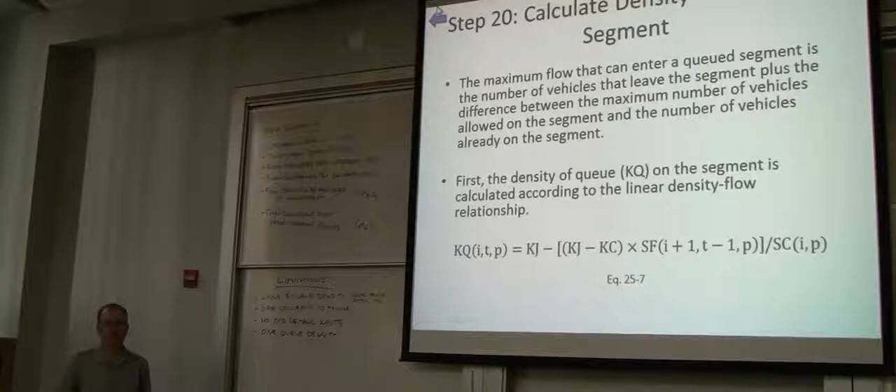Just a couple of comments here. One is you typically will not see that number unless the segment is fully queued. As we mentioned earlier, if you have a segment that is partially queued, what you will see is the combination of the queue density and the background density, which was asked about early on.

And the other question - I can't remember, are we reporting at the end of 15 minutes, what are we reporting? Yes, at the end of 15 minutes, we are reporting the average density over 15 minutes.

And if you do your theoretical calculation, what's my queue density, it's 100, and you look at the FREEVAL output and it'll give you 82. The reason it's 82, not 100, is because the density in the segment slowly but surely grew. At the end, it was fully queued, it reached 100, but on average over 15 minutes, it ended up being 82. In the next time interval, it will likely jump to 100, but within a queued segment, the first time interval when there is queuing, the reported density will be lower than the queue density because it reports an average over 15 minutes.

But the queue itself is at the end - the queue length is at the end. Yes, and that's the confusion. Those two numbers are not the same. They're all in the code somewhere - if you trace those variables, you will see them, but the two numbers are not the same. The queue length is for the end of the 15-minute period. The average density is across the whole 15 minutes. The length is at the end, the density is the average.

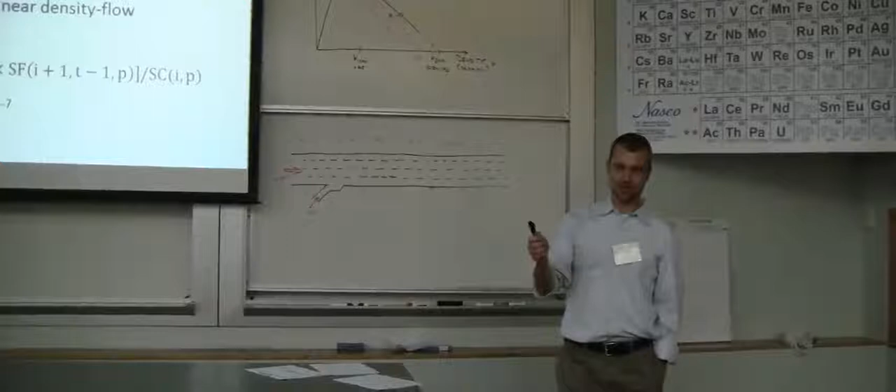Here's what will make it complicated. Changing the curve from the solid to the dashed is easy, but having the density within the queue change over time, that's what gets really tricky. And the list of limitations is going to go down the board. Right now, if you have a fixed demand, fixed capacity over 3 hours, the density of the queue will be fixed - fixed at whatever that drop-down blue line is.

We don't have any queue bunching algorithm. And I'm actually not aware of any data that has looked at freeway queues over time, sustained freeway queues, and whether they stay at a density of 100 or whether they begin bunching to get closer to jam density. But right now, we are only changing the density as a function of whatever the bottleneck capacity is. We're not changing the density dynamically over time.

Okay, my second question about the queue length - I think we're okay there, but I think it was Rick's question. You said the queue is the average of the time period. Yes. Right - no, the queue density. Queue length is the length at the end.

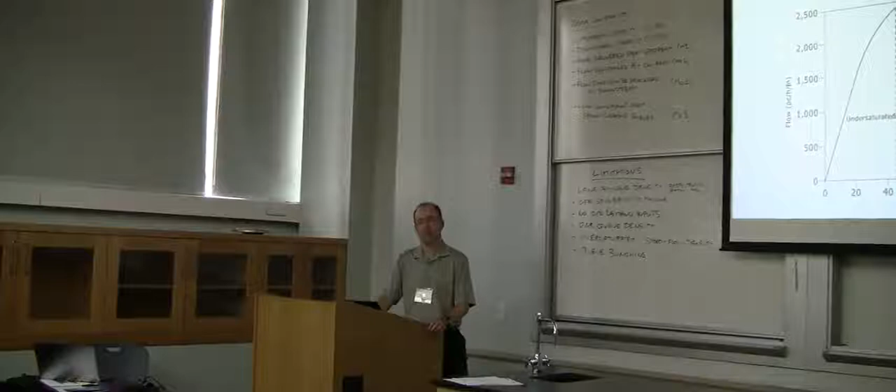At the end, okay. And because our demands are in 15-minute time periods, I'm just thinking aloud here, that's going to capture over the course of a bunch of 15-minute time periods. It will capture the longest queue, because by definition the longest queue has to be at the end of one time period, which is the beginning of another. So we're safe there - yeah, we'll capture the longest queue.

Okay, there's a little bit of discrepancy because the density is an average density, but from an application standpoint, that's not really relevant.

The biggest challenge is really, if you get an audience that actually follows and you're trying to present the data, and somebody asks the question, I don't understand these densities - why are these densities changing? Why are they going - well, undersaturated, I understand they change, but then in oversaturated, why do they change? And that is one reason. And again, the reason we have to do it is to match the fundamental relationship that flow equals speed times density.

We're giving you space mean speed over 15 minutes. We're going to give you average density and average flow over this 15 minutes. It cannot be a single observation - it's going to be the average.

You can also get average estimation too, if you want, over that interval. You could get an average Q, yes.

Again, with just the time, I think we can. I think this is actually a key one. I know we only have 20 minutes, but this MO2 is the constraint that probably prevails most frequently, right? Where the MO2, which is the traffic, it's all still the traffic that can get processed through a node. It's a function of the mainline flow plus any off-ramp flow minus any on-ramp flow, and then plus the...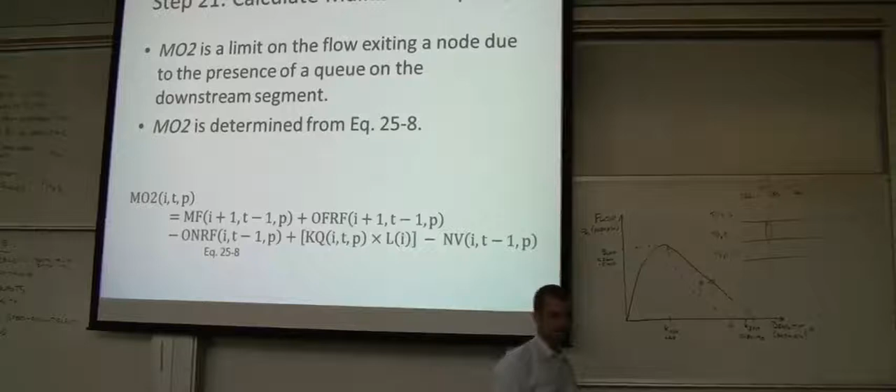And if the segment is fully queued, then essentially whatever that output constraint is, is limited by how much leaves the segment at the next node down. The MF I+1 is the flow leaving the segment in the previous time interval. I can see it, this is where I tripped up. The first term is how much traffic is leaving, or left, that segment in the previous time interval. How many vehicles are in there, and then what are these various other flow constraints?

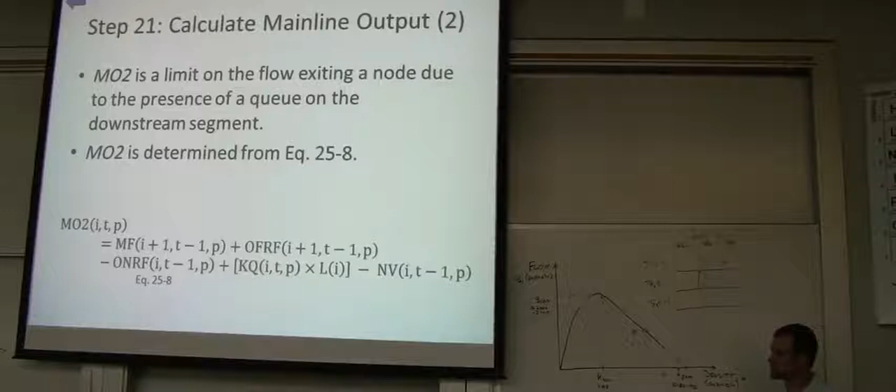So that's the one that in an oversaturated situation, probably 9 times out of 10, this equation is the one that will limit the flow across a node, which then in the next step translates into the flow in the same way. So equation 25-8 is probably the one that prevails most often.

So again, you've got those three major constraints, MO1, MO2, MO3. I think it's important for everybody to have a good feel for those. So what I was going to say is really the rest of this is kind of a lot of administrative stuff, again keeping track of and updating your various variables, mainline flow, segment flow, and so on.

So we can probably breeze through these last ones, Sebastian, if there's anything. Oh, just that's the list on that board. Right, so mainline flow constraints. If I go down the list: the upstream capacity is I-1, the downstream capacity is I, MO1, MO2, MO3, and then the mainline input. Those are all the flow constraints. So what's on the board is a text version of equation 25-30.

Yeah, so these are all going to get checked for each time step, and then whichever one's lowest is going to be your controlling variable.

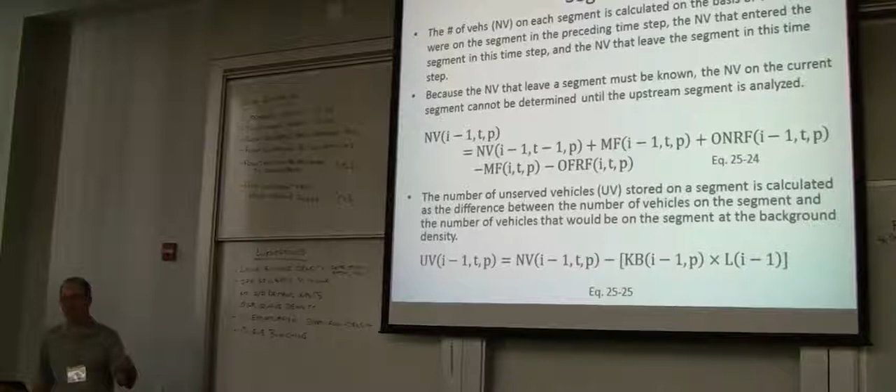So I don't know if there's anything you want to say as I'm going through this. Like I said, it's just doing a lot of variable updating at this point, updating the number of vehicles on the segment, figuring out how many unserved vehicles we might have that carry forward to future time periods and so forth. And again, just the administration of the iterative approach, going to the next time step, next segment, and so on. And then we get into calculating the performance measures for each of the segments and the facility for each of the time periods.

That's about it. You mind pulling up your big flow chart? Sure, because if you're used to looking at code, or at flow charts, you'll end up seeing three big loops. And that's really what all these steps we just went through boil down to: three nested loops. That's ultimately what the procedure is going to end up doing.

So the first loop goes from step 4 all the way up to step 27. That is basically, within a 15-second time step, going through all the segments. So it's the entire facility going through all segments, however many there are.

Once you're at the end of the facility, you go into a loop from step 3 to step 29, stepping through all 15-second time steps. Within each time step, you're still going through the loop of 4 through 27, repeating that every 15 seconds until you get to the end of 15 minutes. Then your biggest loop is from 1 to 31, where you repeat that for every 15-minute time interval, until you reach the end of queuing—not the end of your analysis.

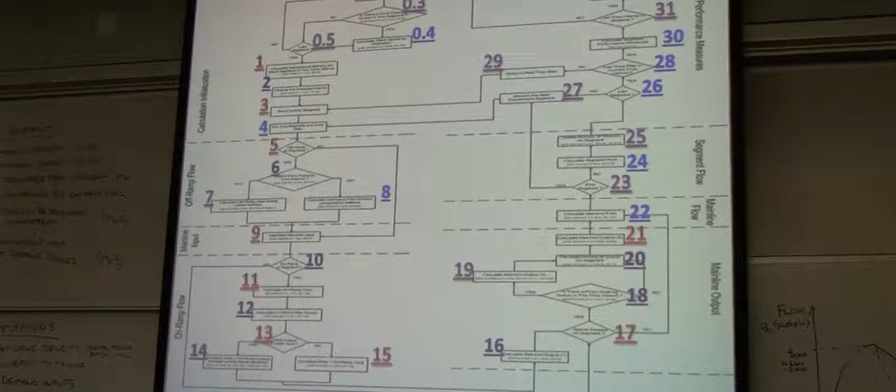You do this until all queues have cleared and you no longer have D over C greater than 1. Really the step-by-step procedure, the heart of the cell transmission model, is step 4 through 27, which goes through every time step all the way through the facility. Then 3 through 29 repeats that for all time steps within 15 minutes, and 1 through 31 repeats it all for your overall analysis. That's why it's implemented in software—you don't want to do these things by hand. If you're trying to understand the method, really 4 through 27 is the key one to understand. Everything else is just redoing it a bunch of times.

What's the sense of the subcommittee regarding the level of documentation required yet?

I don't know, Mike, if you want to answer that, or I can start, and others can weigh in. I think the biggest concern I'd have with documentation—there's two concerns. One is the general understanding. I don't know how understandable the last hour and a half was, but believe me, reading the chapter is worse. Having this flow chart split up over 6 different pages—I like to see the big picture, and when I read chapter 25, I don't see the big picture. So I think there's an explanatory need.

There are also a whole series of sub-steps that are not documented. For example, the on-ramp queue allocation in the SHRP2 C05 final report goes over 10 or 11 pages documenting that method. It's not in here, and it should be. There are some other cases too where it's really not well documented.

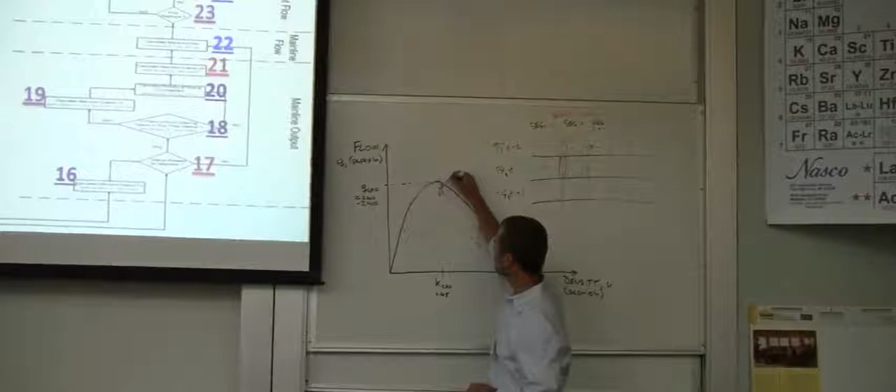You can calibrate capacities. The other thing you can do with this is—so you can't change jam density, you can't change this, however. You could go down. Well, you would change jam density for the whole facility, right? That gets applied across all the segments in the facility. You can't change it at the segment level.

But this capacity adjustment factor of 0.95 or 0.9 or whatever it is, you can change that at any segment at any time interval. That changes a few things—it changes your undersaturated condition. It actually uses equation 25-1, where it fits a new speed-flow curve here, but it also fits a new speed-flow curve here, so that line is then calculated. Essentially you are calibrating both undersaturated and oversaturated by dropping that capacity.

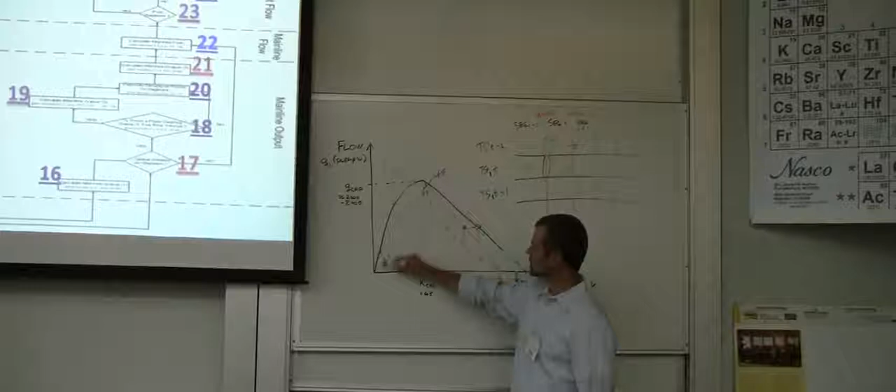However, you can't change jam density, but those are the two you have. What we've proposed through LO8 is that we also let you change the free flow speed. This is going to be impossible to draw here, but if this slope is the free flow speed, we've proposed through L08 that you should be able to calibrate the slope of that line for weather, for example. Your free flow speed under a heavy rain event is not going to be 70 miles an hour. So that's a proposal where you can change the speed adjustment factor, and that would also change the shape on the undersaturated side. It won't affect the oversaturated.

But users can do that now. Not with a speed adjustment factor, but they can put in their own free flow speed. You can put in the free flow speed.

So if I'm doing a big corridor study with the Freeway facilities chapter, and I need to calibrate to existing conditions, changing the capacity and free flow speed is a pretty powerful means of doing that. Now, someone reviewing my work might say, well, you're just entering those numbers so you get the answer you want. And I guess depending on how I do that, it might be okay or it might not be. But I think that's, because this is so much like a simulation model, and it's very similar to FREQ that Rick mentioned. That's what users of FREQ did. Well, I don't know if this is the HCM's job to offer calibration guidance, but I think there's certainly a demand there on the Freeway side for sure.

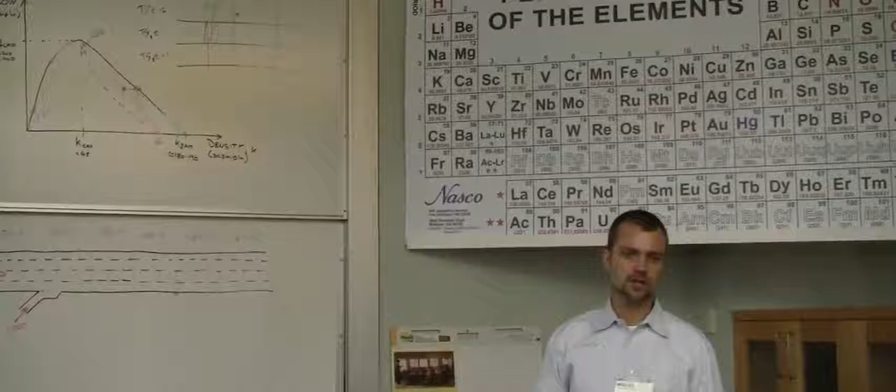The other big question, going back to your documentation when we do workshops on the Freeway facilities method, the biggest stumbling block is the segmentation. That's taking a facility and dividing it into different segments. It looks really easy here, but a real-world facility looks nothing like this. It's the biggest stumbling block, and we've been getting some FREEVAL models for the L08 contractor teams, the teams selected to test the L08 method. I just looked at one last night where the segments, I haven't even seen the main facility, and I just know that the segmentation is off, because there are overlapping ramp segments everywhere. I think that's a big knowledge gap, in terms of misapplication of the method, actually understanding where to draw the lines, when you don't have a clean 1,500-foot ramp influence area, because in reality, it doesn't look like this. In reality, it looks like this, and then you have a ramp here, and then you have an upgrade halfway in between. And how to separate that is not always clear.

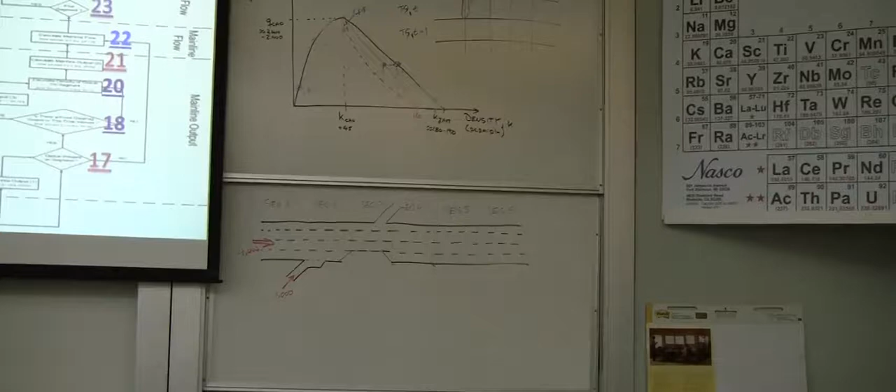Is it an issue of lacking guidance or difficulty in applying the guidance that's there already? Because I think the issues in the HCM don't necessarily do a very good job of explaining the segmentation at that level. It might be more of an HCM applications guide challenge, where how do you take chapter 10 and apply it where segments aren't clean? How do you go about it, and we have a whole series of examples, where, well, is this a two-sided weave or is it an on-ramp, off-ramp, with kind of a lane add, but I know from local knowledge that there's a lot of weaving friction, so it takes some judgment to ultimately pick the segment that will give you the performance you want, and that's not always straightforward.

A few minutes left. Questions from the floor?

Actually, maybe it's good to talk a little bit about what happened in L08, since we have a full committee in terms of the major additions that were done in L08.

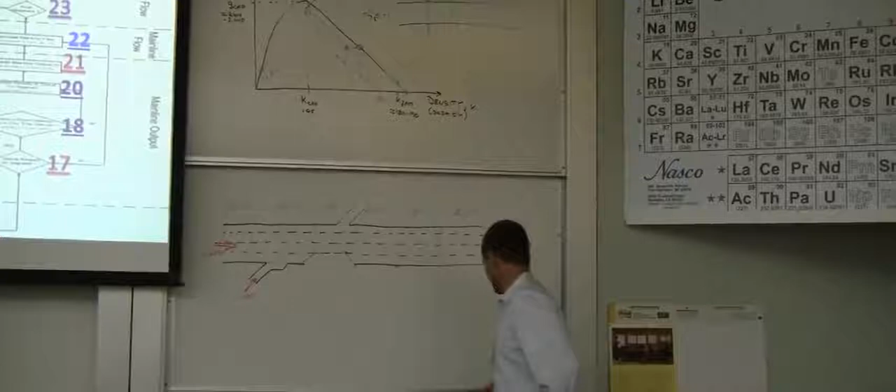Right, so the major additions, I don't have a list here, but let me try and draw. As opposed to putting a bunch of PhDs in a room with a whiteboard. You don't know what's in the... Rick, you want to turn on the lights in the front? Turn on the lights in the front, turn on the projector.

Thank you. The biggest thing in terms of LOA is currently, if we look at chapter 11, we have in our speed flow diagram a free flow speed that goes up to some break point. Then we have this curved portion up to whatever we call our capacity. That's defined at the density of 45.

What happens on the oversaturated side emerges out of chapter 25. We've always had this capacity adjustment factor that essentially drops the capacity along the 45 density line, and there's an equation, now 25-1, that connects the two. That equation, by the way, is not based on field data—it's based on expert judgment, Maggie, right? Is that what you call it? But this equation is in there.

We've said with LO8 as well, wait a minute, this is really not enough, because we have cases where we may need a speed adjustment factor. Lauren, you mentioned you can already change the free flow speed, but the problem with changing the free flow speed is it changes your delay baseline. If you change your free flow speed, all your delays are now estimated relative to the new free flow speed. In LO8, delay induced from a weather event, we want to reference back to the black line as opposed to whatever this lower line is. So we've proposed a modification of 25-1 that lets us fit the speed flow curve that looks something like that, with some limits—if your speed drop is more than your capacity drop, you don't get an upward curve, those kind of things.

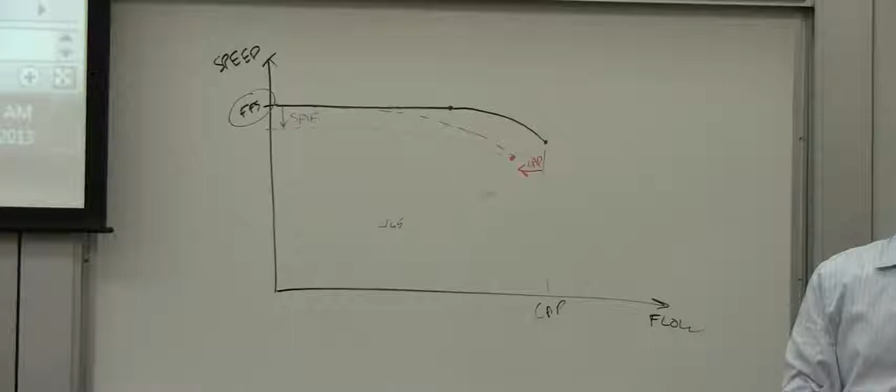The second big change in LO8 is the queue discharge, where basically whatever this throughput is here—that's similar to this capacity adjustment factor—you could have a queue discharge drop alpha of whatever, 5 to 7%, that then reduces the throughput to a bottleneck while a queue is out. That's based on a lot of research that basically shows that effect.

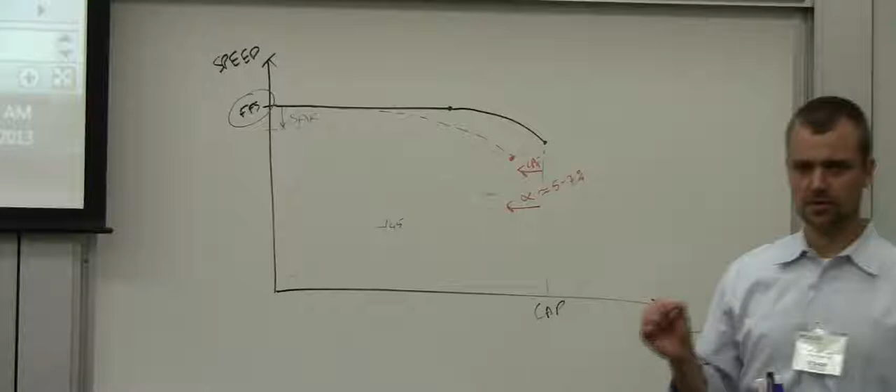Another very big change in LO8 is that right now, in HCM 2010, you have no way of calibrating a weaving segment or a ramp segment. So the capacity adjustment factor and the speed adjustment factor assume a basic segment, and you have no way in chapter 12 and 13 to change either of those values. In fact, both chapter 12 and 13 are not always true to the fundamental relationship where you do a capacity check first and then estimate the speed. Changing the capacity in chapter 13's weaving segment will have no influence on your speed results, because the two are independent regression equations.

So the big challenge in LO8 was, well, how do we go about modeling weather effects in a weaving segment? How do we do that? Because right now, in the current version, if you put a capacity adjustment factor, it overrides whatever segment it is and uses that dash column—so in a way it ignores the weaving method and treats it as a basic segment.

The problem is you could have cases where your chapter 13 weaving speed is here, and then you do a capacity adjustment factor due to weather, and your speeds go up. Because of that inconsistency, we went into chapter 12 and 13, into the algorithms that Roger had developed, and implemented or proposed an implementation for CAF and SAF within chapters 12 and 13—not based on any data, just based on looking at the equations. Wherever it said C, we now put C times CAF, and wherever it says S, we put S times SAF. That's a change we had to do to avoid speeds jumping up when it starts raining.

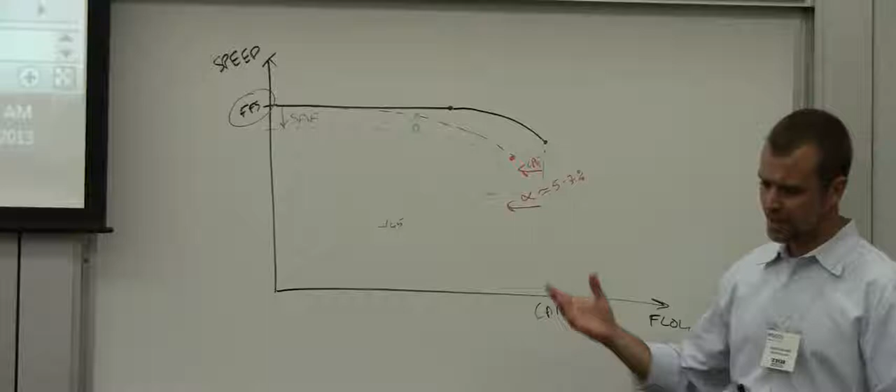We also put in a denied entry queue length calculation, because a lot of our scenarios had queues that did spill back beyond the beginning of the facility. So we just calculated that queue length and report it now.

But I think in terms of the three really algorithmic changes, it's the queue discharge capacity, it's the speed adjustment factor, and it's the CAF and SAF for weaving segments. And there's a TRR paper from last year that documents all those. That was accepted by the committee.

Speaking of, so Hale is here.

I just thought of another question. This has nothing to do with LO8, but on the weaving methodology, Roger may have to help with this. The determination of whether it's a weaving section is based on the geometry and the volume—I should say, probably demand. So for an isolated weaving section, that's relatively straightforward. But in a case where the queuing is affecting the demand and the volume, are there cases where you come in or out of a weaving section definition during the evaluation within Freeval?

But independent of queues, whether or not a segment operates as a weave depends on the lane change rate per mile, basically. And so, because we can't change the segment length, but we can change the demands and the ramp patterns from one interval to the next.